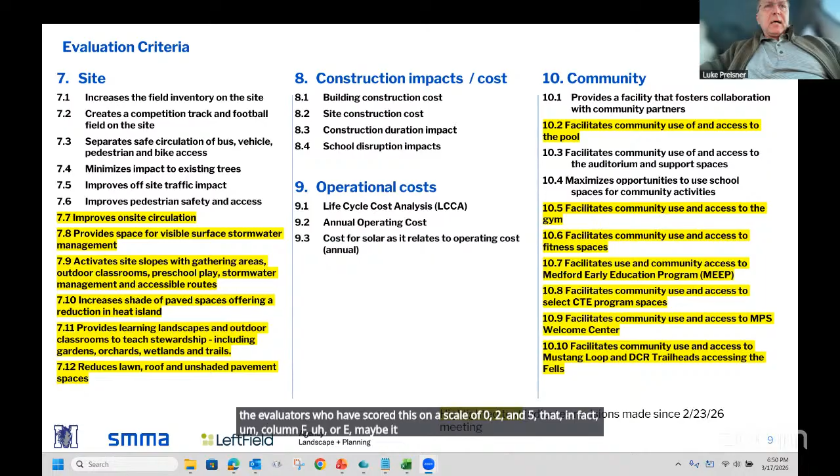Yes, I do. I'm reviewing the matrix that Matt sent out, dated 3/12, and with the code compliance option, there's a lot of red. I wanted to clarify and get an answer for the record: what we're looking at here, what we should have in mind when we see code compliance, is our existing structure after $437 million has been invested into it. So it's not the current school—it's the current school plus about $440 million worth of improvements. That's what I have in mind. For that reason, I'm surprised at some of the zeros I see in terms of magnitude of maintenance cost—I would expect it to be better after $440 million. So I just wanted to confirm with the evaluators who scored this on a scale of 0, 2, and 5 that column F, or maybe E, is in fact our current building with the benefit of $440 million of improvement.

If it's all right, I think the point is well taken, and we're going to get into the actual evaluation that was distributed to everybody. What we want to do right here, before we get to the voting piece, is just field comments on the actual criteria on screen, to make sure we have the evaluation metrics right that will be in the left-hand column as we go through the document. So is it all right if we just table that response?

Yeah. Are there any questions about the revisions to the criteria highlighted in yellow? I think this is the last page. Yeah.

So we have already voted to approve this criteria and no changes were made just now, so we don't need to vote on that again. We did that in the last meeting.

So I think we can move along to the matrix, Matt, if you want to pull that up and go through that. A is the first column, so we'll get to Luke's question first, but if you want to give a bigger point of view.

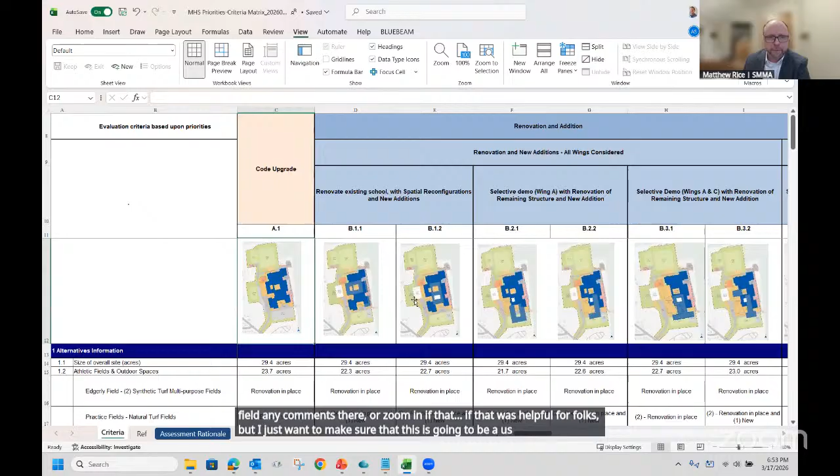Sure. We're going to dive right into the live Excel file because this is one of those inherently illegible pieces at that scale. So I want to make sure this is legible for folks as we go through. I've tried to make constant the names and references to the alternatives across the top. I could freeze up the images, but then we're left with a tiny sliver of information below. Happy to field any comments there or zoom in if that's helpful.

I just want to make sure this is a usable format moving forward. I don't know if anyone has thoughts on that before I dive in. Or if no one objects, I'll assume this is legible for folks. If you could just zoom in a little bit. Sure. Yep, thanks.

So just to refresh, I think everyone is familiar with this, but for folks watching online who have not been acclimated to this evaluation matrix, the categories we're evaluating on are listed down the left-hand column. These are the same categories we were just looking at, and any that were modified by the building committee during our last meeting are highlighted here, similar to how they were on those slides. If you get down to the 7s and 10s, you'll see those same highlights we were looking at, so you can understand the criteria.

And across the top of this document, we have the actual set of 29 different cost alternatives that were looked at through the course of the PDP phase. So really what we're going to engage in now is to look through the seed populating of this matrix that SMMA completed at the request of the building committee, just so there's an initial talking point we can look at.

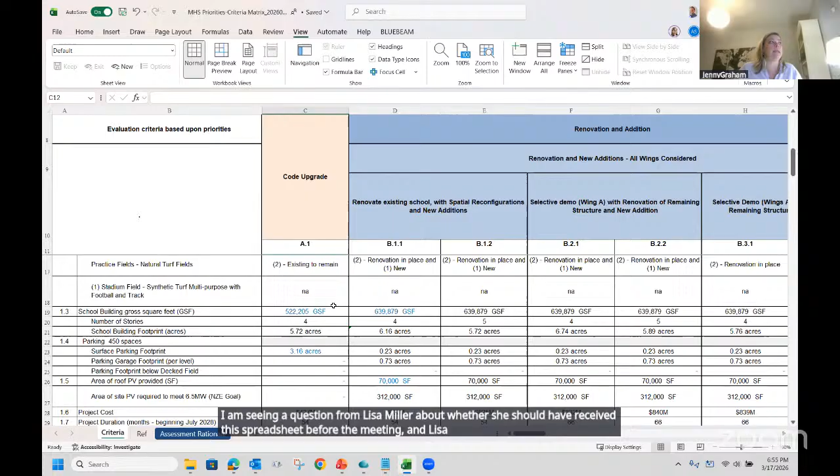I'm seeing a question from Lisa Miller about whether she should have received this spreadsheet before the meeting. Lisa, the answer is yes, you should have received this on Thursday of last week. I'm going to forward it to you right now so you have access, because this spreadsheet is really hard to manipulate given how it's been sized and paginated. Having your own copy will be very useful. Let me just forward it to you. Thank you, I appreciate that.

Yeah, it's a rough one. So let me do that right now.

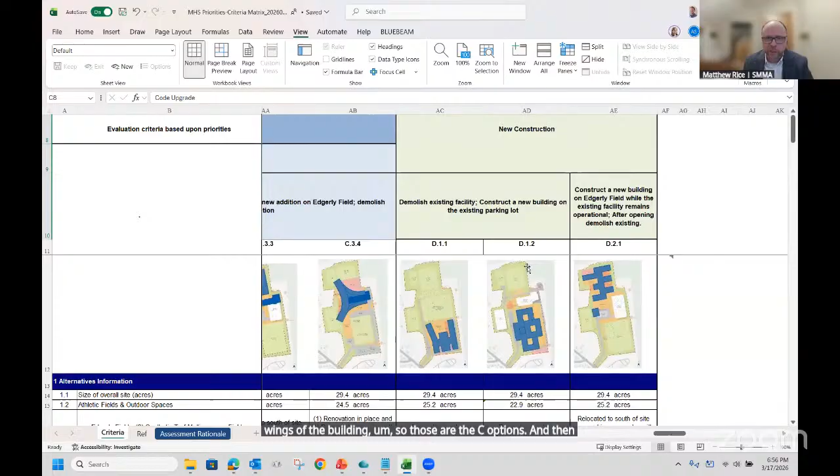All right, so maybe just as you're doing that, Jenny, to finish up the explanation of the information running across the top: we are grouped into our A, B, C, and D sets of options, with A being this code upgrade option, here the A.1. Our B options are addition/renovation options that keep and remove different wings of the existing building across the existing footprint. The C options are addition/renovation options that focus solely on keeping and renovating the existing gymnasium, pool, and athletic wings. And finally the D options are the new construction options running across the top. So that's the 29 columns across the top that we see.

I'll jump down into a quick explanation of category 1. As Helen mentioned, these are more comparative facts about each one of the alternatives, so that everyone can evaluate those in one spot and see them up against each other.

Once we get into category 2 and below, these are the actual evaluation criteria. The criteria scoring used was unfavorable, which is a 0, shaded red. There's a neutral rating of 2, which gets an orange color. And then there's a favorable rating, which is a 5, automatically color coded to green.

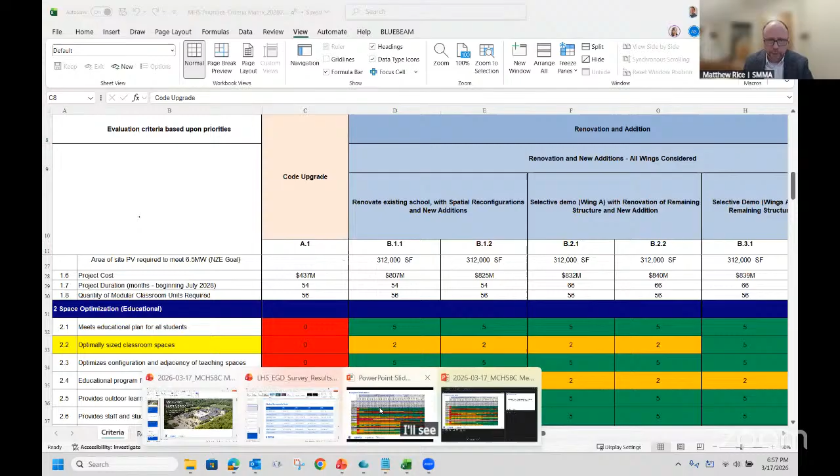So if we went back to the PowerPoint, when you see the reds, oranges, and greens, you can get a visual sense of what the individual alternatives are rated at. And then we do total those numbers at the bottom for an evaluation score.

Now, the outcome of this activity, as we fill out and discuss the criteria points, will certainly modify the scores as we go through. The scores are not requiring the building committee to pick the highest score. This is for comparative purposes—it's really a measurement of how each alternative meets the various criteria laid out and agreed to by the building committee.

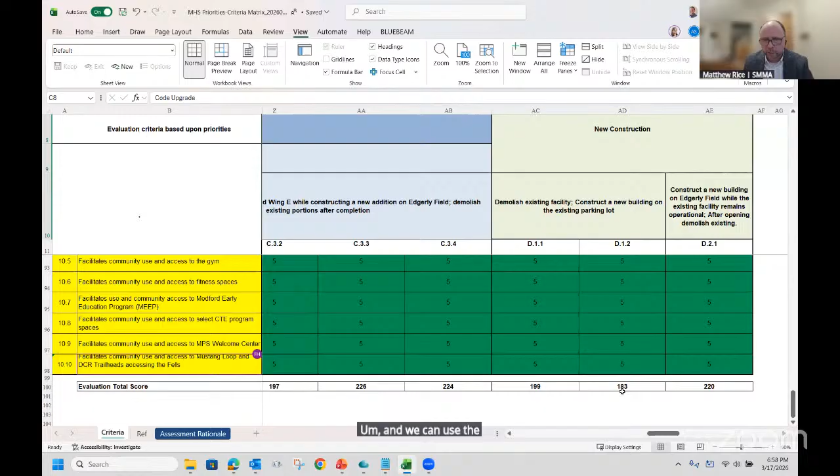So really it's a measure against that. We can use the bottom line scores to inform the thinking moving forward, but there's no requirement to pick the highest and move forward with that. That'll still be a decision from the building committee at this time next week or Monday. So from an organization and orientation perspective, is that helpful in shedding light on how the whole thing is structured and the activity we're going through today?

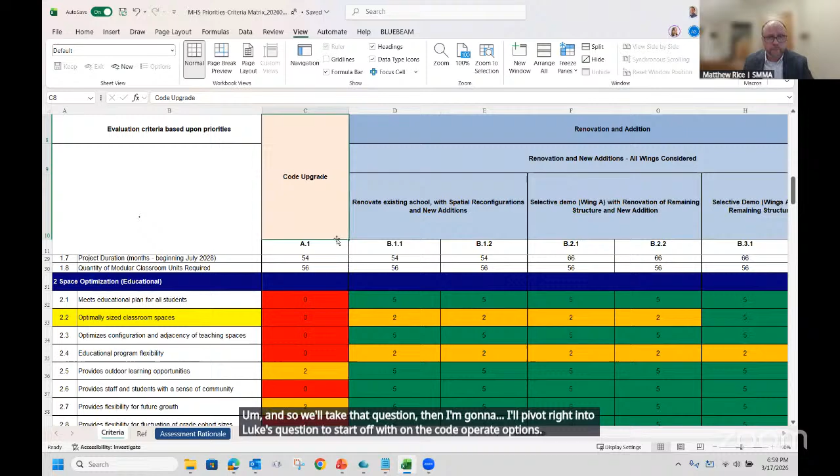So we'll take that question, then I'll pivot into Luke's question on the code upgrade options. Luke, do you have a different question or comment in response to that?

A different question, easy one. Who provided these scores? It was SMMA that generated them—a lot of it was going through on my end, trying to synthesize the various pieces of information. Thank you.

Are there any other questions about the general layout of this document before we dive in? I have a question, Phil? Yes, so the unfavorable, neutral, and favorable—is that in relation to the educational plan, or what are you looking at when determining whether something is favorable or not?

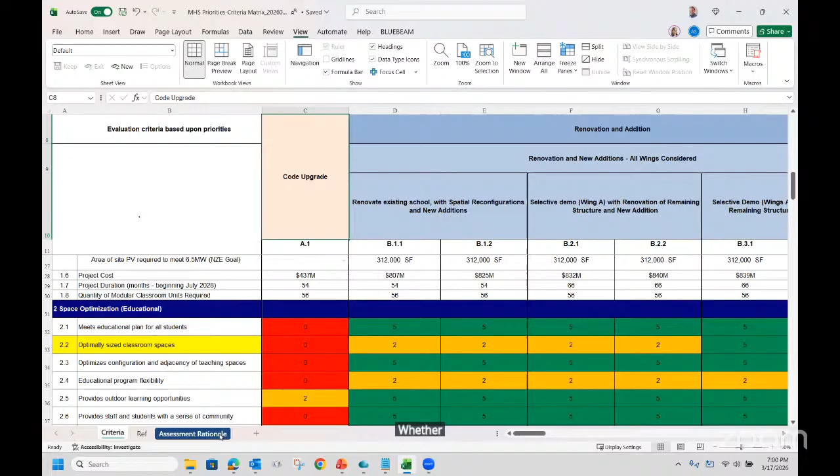That's a great question, Phil, thank you—sort of a segue. There's another tab in this document. There was a request by the building committee at our last meeting to provide that exact rationale to explain what each of the criteria was judged on. Some criteria are more subjective in how they were evaluated, some are more objective with a numerical basis tied to them. This tab runs through and provides the assessment rationale, as the tab is noted, behind each one of the criteria. So if you have this document open, you're welcome to flip to that tab so we can get a sense of what was used to evaluate the different criteria.

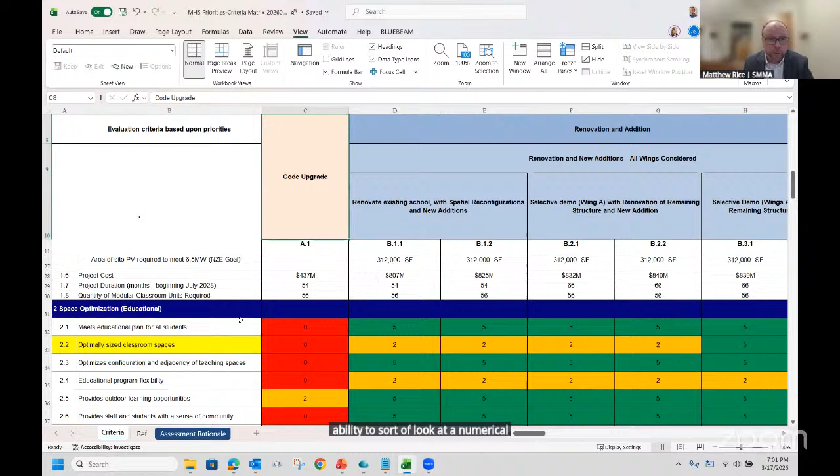In some cases we are still very early in the process, and there are some criteria where we may have a more objective ability to look at a numerical comparison as we move forward, but we don't necessarily have that information just yet in terms of the overall evaluation.

I'll point out, while we're on this topic, if we go down to operational costs here in 9, there's been no ratings assigned because all of these items fall into the category where we just don't have a way of accurately representing what a life cycle cost analysis would be, annual operating cost, or the impact of the solar PV panels on operating cost. We will start to get some insight into life cycle cost as we get farther along in the PSR phase, and that's actually one area where focusing in on a smaller set of options will help us get insight into that topic more quickly.

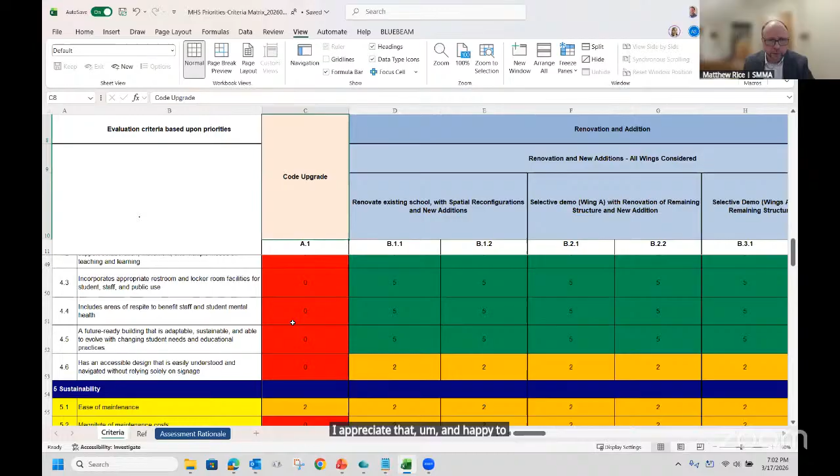Does that help answer your question, Phil? Yeah, it does. I think I'll just read through some of those as we go and pick and choose which ones we're looking at. So thank you. Appreciate that. And happy to hop over to the assessment rationale tab as part of the meeting here, if that's helpful for folks.

Matt, can you address Luke's question about code upgrade next? Yep. So the ratings for the code upgrade option, we're assuming that the building is improved to meet accessibility code, energy code, structural codes as part of that scheme itself, that alternative. So it does represent the investment of the $437 million that is listed as the cost for A.1 in terms of the evaluation criteria that's here.

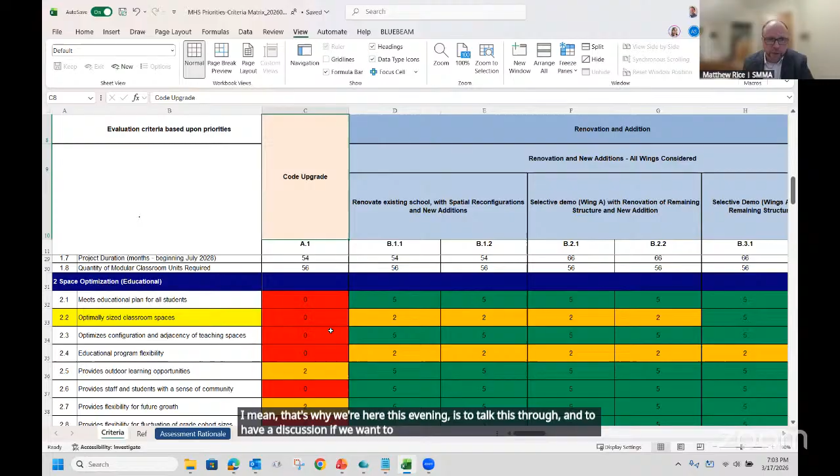And certainly happy to go through the dialogue on the code upgrade option here. Again, this is sort of the perspective that I had going through it, but complete respect the fact that others on the building committee may have different perspectives. And I mean, that's why we're here this evening, is to talk this through and to have a discussion if we want to make modifications to it. As a collective, that's exactly what we're here to do.

And I think, Matt, Luke was zooming in more on the maintenance aspect of the... Thank you, Helen. Yeah, I pointed out maintenance, but there's other ones. There's one, for example, 4.3, talking about appropriate restroom and locker facilities. I would imagine for $437 million, we would end up with appropriate restroom and locker room facilities, regardless of what we started with.

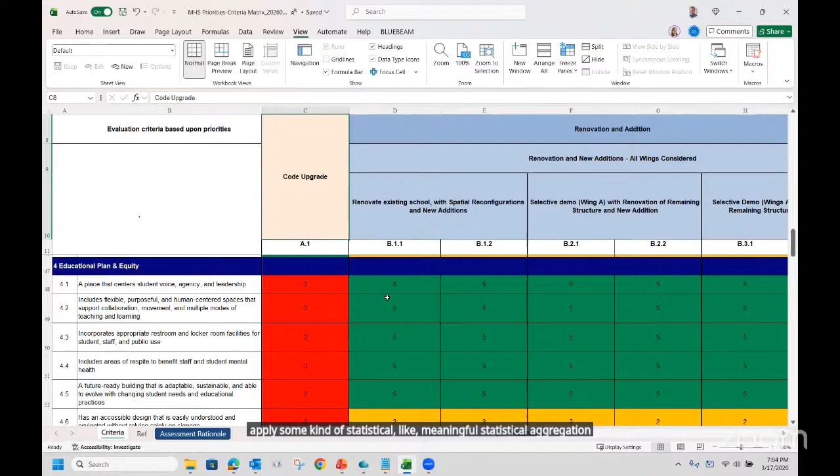There's other examples, and if we wanted, everyone could take homework and score this however they like. And either Left Field or SMMA could aggregate, average, or apply some kind of meaningful statistical aggregation method to have kind of a composite score, so that it's not just one person picking between 29 concepts. It's a collective effort. I'm not making a motion right now, but I'm just saying, one way to maybe capture the voices of the SBC.

So the goal for tonight is that we will emerge with a chart that we agree is reasonable to use for comparative purposes. That does not mean anybody has to agree with every single item, nor does it mean we must use any bit or all bits of this data next week when we make reductions to sort of narrow in on 3 to 5.

So everybody is absolutely welcome to take this and make their own version of it and use that for how they want to proceed next week in terms of what they want to learn about, what they want to study further. But for tonight, the goal is for us to collectively get to a matrix that we can put on the website and share as a working draft, as a working document that this team is in agreement with.

So if you have a specific proposal, just like we did last time, if you have a specific proposal for something that you would like to change, and maybe let's just take this like a chunk at a time, we can poll the committee and take a vote about what those changes might be. So let's start with A.

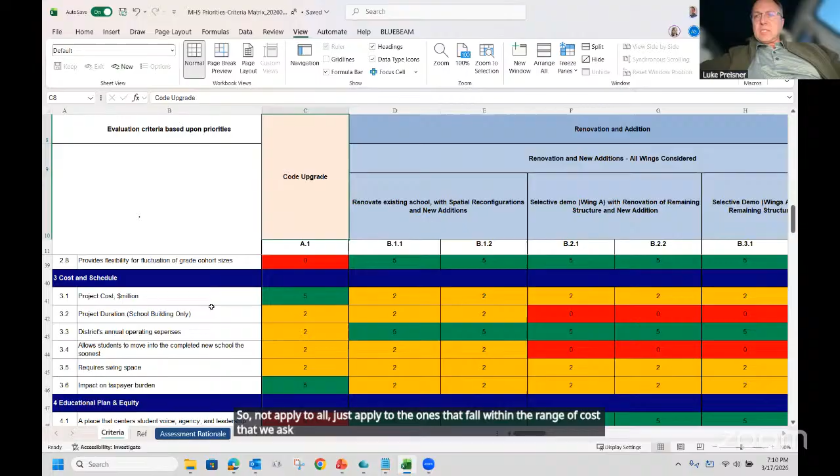Is there a second? Oh, and also to only the concepts that fall within our RFP range. That's an important part—I want to reward the concepts that are within our RFP range. So not apply to all, just apply to the ones that fall within the range of cost that we asked the design community to consider for our project.

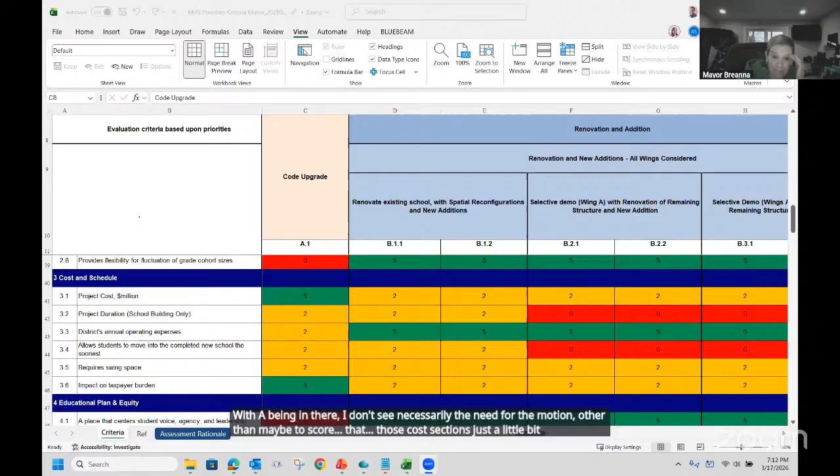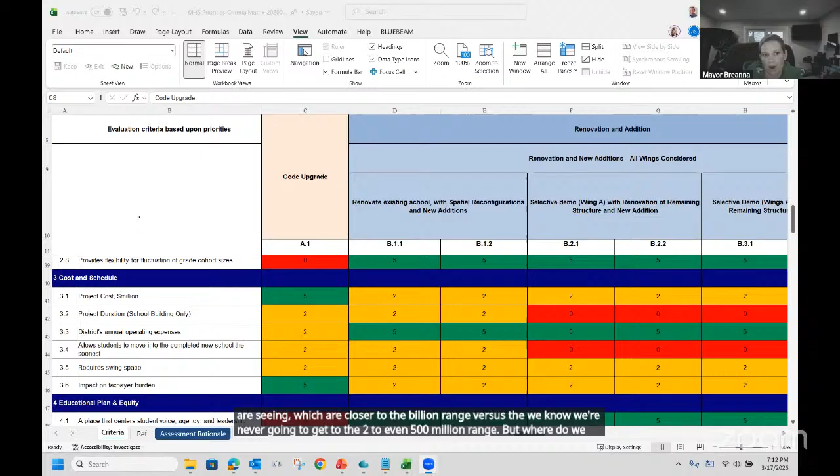I'm trying to understand the motion, but either way, I think whether it's now or the 23rd when we have to actually go down from 29 to 3 to 5—I noticed in the presentation that we will be having a meeting on cost, or two, in May. With A being in there, I don't see necessarily the need for the motion, other than maybe to score those cost sections just a little bit higher, because a few of us—and I know myself—are nervous about the cost and the price per household and what we're hearing when we're out and about. We all on this call want to see the debt exclusion pass come May 2027. So there needs to be a time that we talk about the price tags we are seeing, which are closer to the billion range versus we know we're never going to get to the 200 to even 500 million range. But when do we talk about the cost and making the tough decisions to figure out what this community is willing to vote for and pass, and how much our residents are willing and able to pay? That has to come at some time, now that we know all these numbers and we need to narrow down, that we just need to talk about that.

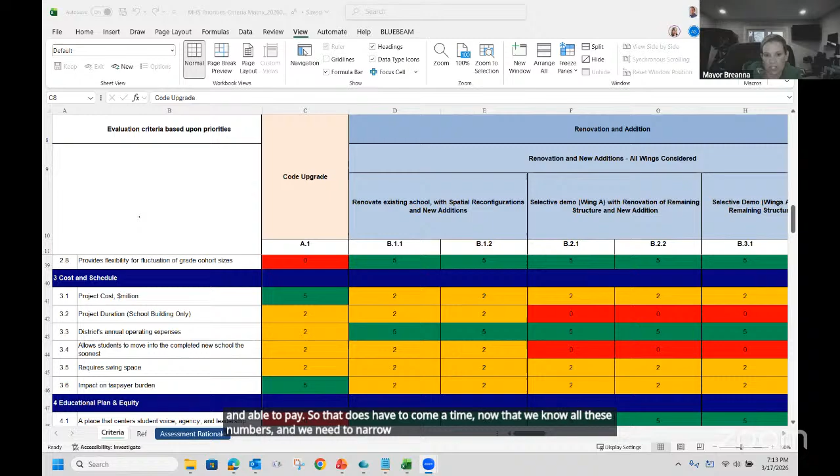Respectfully, now is not the time. This is not the right time for us to be arbitrary in how we move forward. This is a time for us to commit to the study that will help us refine these numbers, because these numbers are based on very, very high level things, and we'll be able to know the cost more precisely once there is more work done by the design team.

So I'm still not hearing a second. Paul, did you have your hand up to provide a second? No, and I'll lower my hand. Okay, I'm not hearing a second. In the interest of time, let's move on.

Are there questions about the B1 category or the B2 category?

And Matt, maybe you could just describe those two categories briefly for us so that everyone is oriented.

Sure. I know it's a little tough to see these diagrams, but these will give you an idea of generally what's going on. Someone will just have to help me with the colors to start off with. The dark blue, that's where my cursor is here. Yes, that's the existing building that would be renovated in place, the footprint of the existing building. Is this a blue-gray, maybe? That's good, okay, I'm good, I'm 2 for 2 right now.

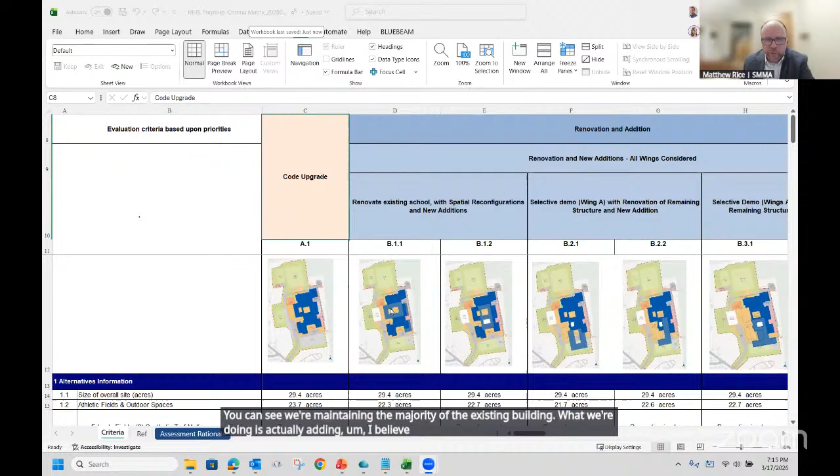The blue-gray represents addition construction in the overall scheme. So in this particular B1.1, you can see we're maintaining the majority of the existing building. What we're doing is adding, I believe this was 2 floors on top, or maybe just a single floor over this section, as well as expanding out the CTE wing in a couple directions towards the east and towards the south. So B1.1 and B1.2 is really trying to keep as much of the existing building as possible. B1.2 is similar to that, and this is the one that is adding in yet another level, because you can see that we go from stories 4 to stories 5. This also, in some of these options, you'll see that there are some white areas here as we go through in the B-wing, where we're proposing there will be some selective demolition, essentially carving out the center of the B-wing, because we have science classrooms as well as general academic classrooms and special education classrooms that all have no windows in the middle of that B-wing right now. So that would be something we're trying to alleviate as part of these initial B options that we're looking at. So that's B1.1 and 1.2 - basically keeping the majority of the existing building and adding to it.

Are there any proposals to change the rating or evaluation of any of the B1 or B2 options?

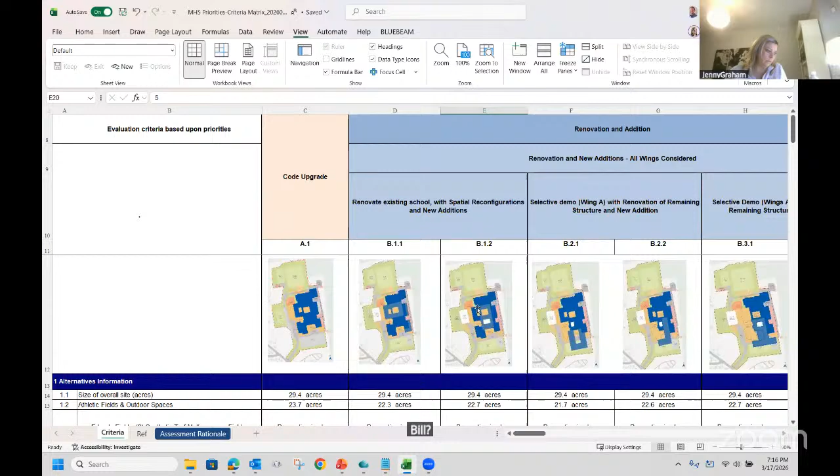Bill? So I don't have a proposal to change the option. I was looking at it because there's so many options and so many criteria. I was trying to streamline the analysis, looking at what criteria have a lot of variability in their rating. So 2.5 to 2.8, they're all green, aside from the code upgrade, so there's no point looking at that in my opinion.

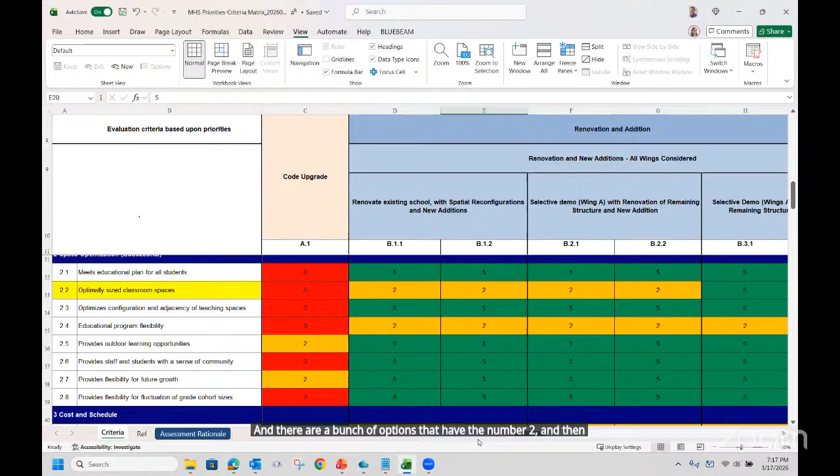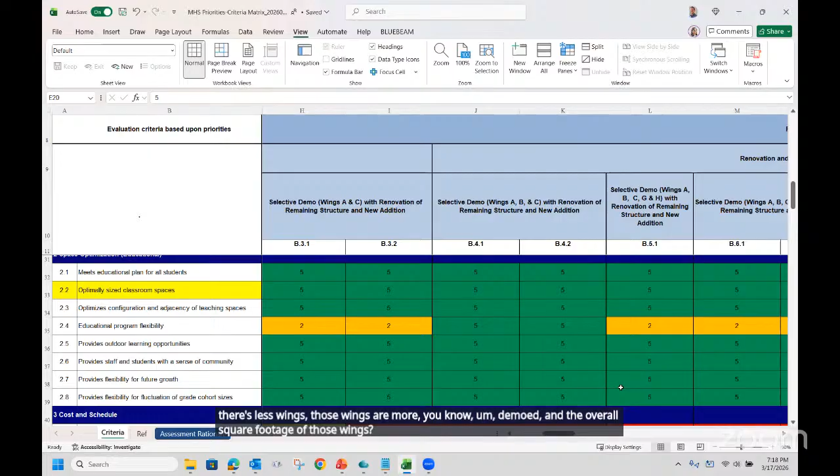So I was looking at 2.4, educational program flexibility. There are a bunch of options that have the number 2, and a lot of them that have number 5. My question is on B4.1 and B4.2, those are 5s, and those have selective demo of wings A, B, and C. Then the column next to it, 5.1, has more wings being potentially demoed, but it's only rated as a 2. When I went to the assessment rationale, it was evaluated on the percentage of existing construction maintained, which will drive program flexibility. So I was curious why those got a 5 rating - is it just because even though there's less wings, those wings are demoed more, and the overall square footage of those wings supersede the other ones on the other columns?

Yeah, it's a good question, Bill. There's some subjectivity in trying to understand what educational program flexibility means. But the reason 4.1 and 4.2 got rated higher - and we're happy to modify this as part of the process - is that the classroom heavy wings are the ones being built predominantly new in 4.1 and 4.2, versus in 5.1 and say 3.1 and 3.2. It was looking at the percentage of existing classrooms, with the understanding that existing classroom wings provide an inherent limitation in terms of flexibility, or at least that's how the scoring was viewed and evaluations were made. If there's something that doesn't look like it's aligning with that, it may have just been not having a complete connection between the rationale, but that was the thought process for why some got 5 versus 2 in the ad-reno schemes. Whereas when you move to the new construction, you'll see they're all pretty equally 5, because we would have the ability to design in that flexibility.

Okay, yeah, and I would say, Bill, I noticed the same thing. There's actually a small number of things for which there is the majority of the variability, and I did spend more time looking at that than all the places where there was stuff in common, to make sure that I understood where those variabilities were.

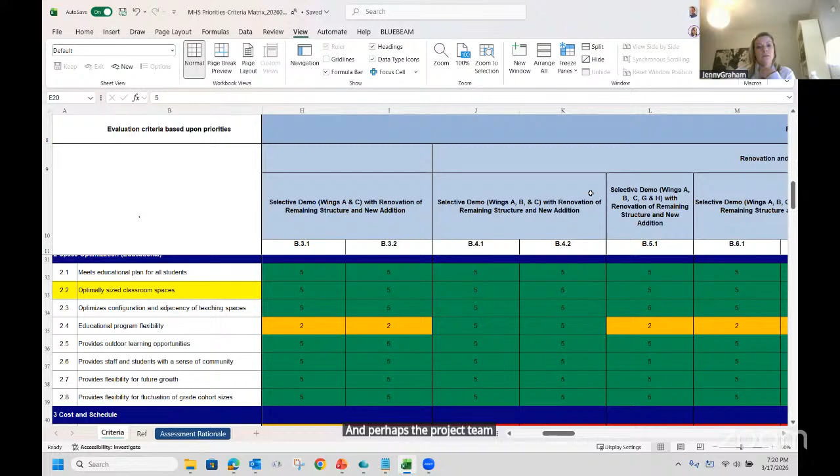But it is a substantially smaller list than this whole thing, if you were to pare down this view to the things for which there are differences. Perhaps the project team could give us a view that's a little easier to read, where the only thing we're seeing are the things that are materially different. We can talk about that, or maybe somebody can make a motion about that later on. Lisa has her hand up.

I was just wondering if somebody could clarify what we mean by flexibility. Are we talking about configurable spaces with dividers that can be moved around, so that the physical space itself is flexible, or are we talking about flexible usage? What would that mean in terms of design? That's my main question.

I think it's the first thing you were describing, Lisa, in terms of having some ability to reconfigure the program around and put the program into the spaces in a variety of ways. That's really what was guiding the thinking, saying that if the existing classrooms in the C wing are a little bit smaller, you just have inherently a smaller opportunity to consider putting something different than a classroom, or having to expand the walls in some directions to get to the target classroom size, the target program size, as part of the process.

So just as a follow-up: it would mean having partitions that could be moved around, or some way of reconfiguring the space. Have you found that other schools designed with that flexibility actually use that flexibility?

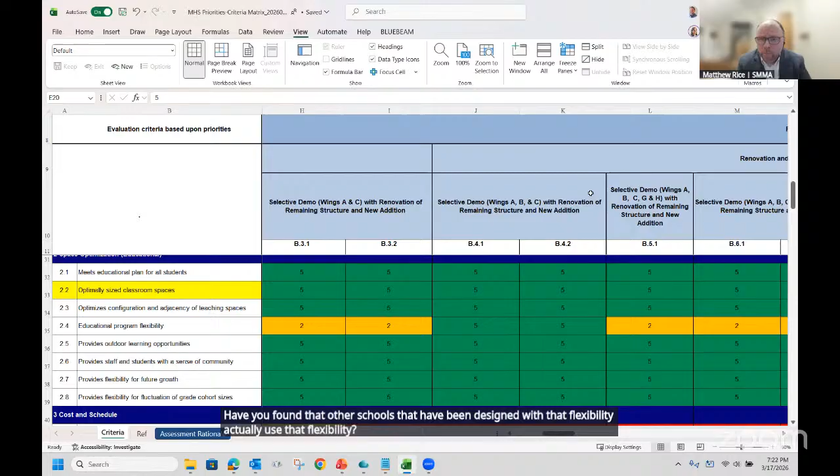There's some that do and there's some that don't, in terms of the operable partitions. I think it's part of the school culture. Usually in any project scenario, that is not present as an option in terms of the overall operations of the school. So whether there's professional development done as part of the project in advance of the new building opening, some of that can really help to leverage the flexibility that would be built into the building that way. Thank you.

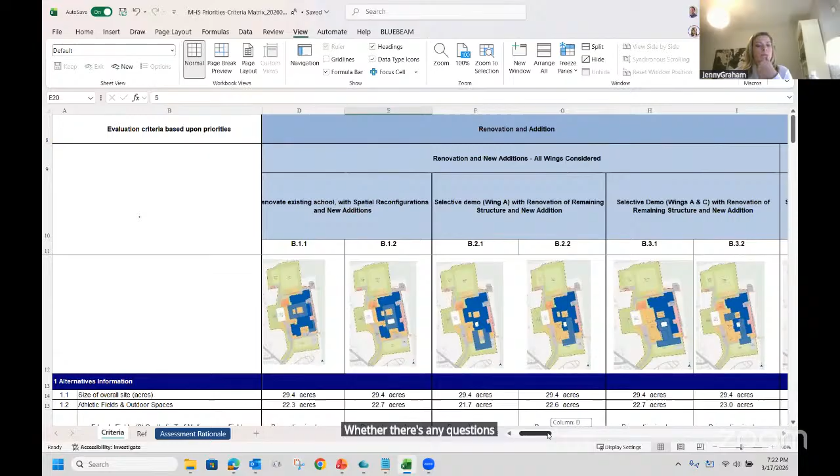Can you describe categories B3, 4, and 5 to us? Then we can ask whether there's any questions or clarifications of those three items or categories. Yeah, and I didn't go through B2.1 and 2.2 — do you want me to? I'm sorry, yeah, so I can capture all of those, because you'll see the pattern generally in terms of how they evolve over time.

We're starting to look at pulling away existing wings of the building and providing more new addition space just to compensate for the removal of the existing wings. So B2.1 and 2.2 really look at the removal of primarily the A wing, the performing arts and arts wing, in the bottom left-hand corner here. You can see the additions being proposed — in this case, if we look at the number of stories, this is a 4-story addition in a U shape.

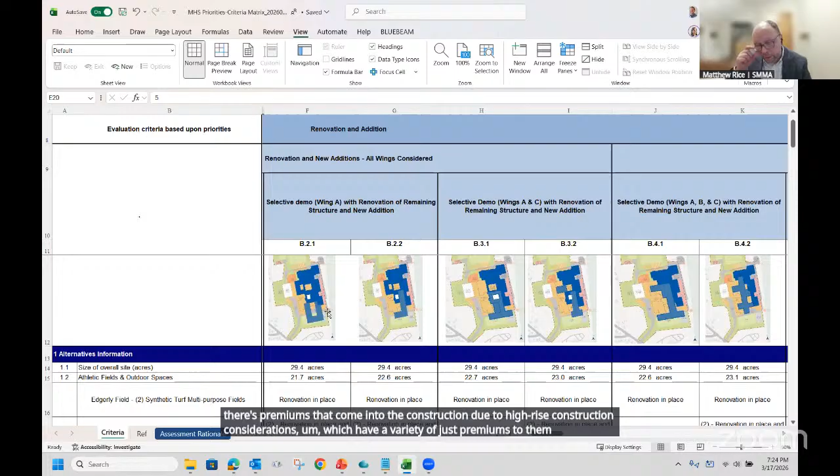This addition actually proposes going over the top of the existing B wing in a 5-story option. So in most of these options, where we're looking at 2.1 and 2.2, we're looking at different ways of massing the building. As we go higher, there are premiums that come into the construction due to high-rise construction considerations, which have a variety of premiums on a mechanical system basis, as well as fire code and robustness of construction. So we're giving different options — we wanted to understand the cost benefit.

When we go higher, you also get more opportunity to utilize the site area in different ways. Even though these sites haven't been fully designed yet, it's really allowing for some opportunity moving forward. So that's between B2.1 and 2.2.

It is that removal of the A wing and then additions in different configurations. 3.1 and 3.2 are looking at the removal of the A wing as well as the C wing, one of the primary classroom wings, which has the most classrooms within the existing building. A lot of these will build south towards the existing parking lot, some consuming the entirety of the lot, others consuming more of the entry plaza, based on the addition sizing needed to meet the overall area.

So 3.1 and 3.2 are both taking C wing and A wing away. In 3.2 there's new addition construction shown on top of the C wing footprint, while 3.1 does not have that. Both options are looking at carving out from the B wing to alleviate the issue of windowless classrooms.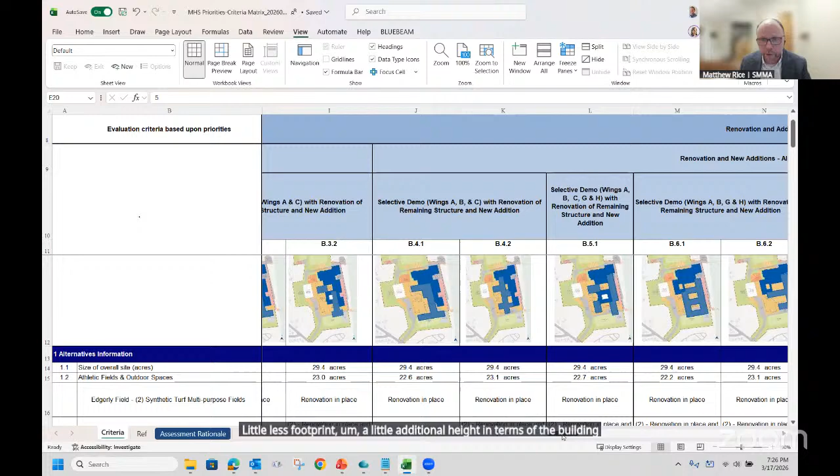Do you want me to keep going with that, or should we pause there maybe on the 4.2?

Yeah, let's pause there. Are there any questions about B2, 3, or 4? I can get them all on the screen.

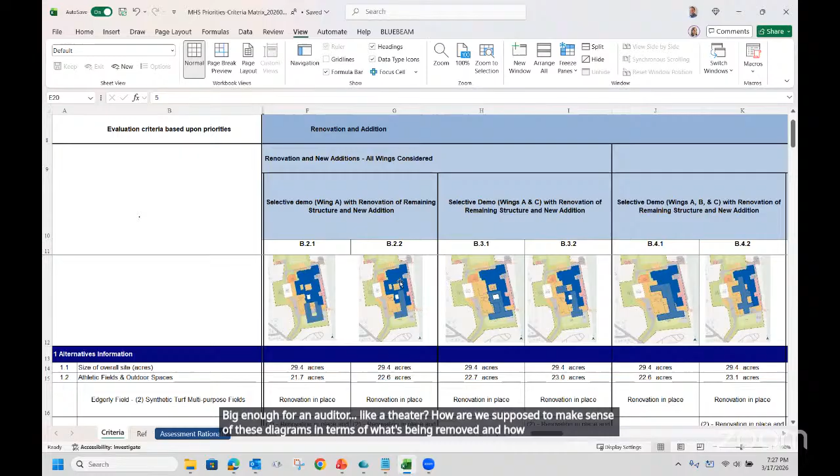I'm sorry to ask again, but can you help us understand in the diagrams—like if you're tearing down a building, that means the theater is being torn down. But if I look at B22, it doesn't look like the new construction has a space that's big enough for an auditorium, a theater. How are we supposed to make sense of these diagrams in terms of what's being removed and how the design would accommodate things like the theater?

So from a high level perspective, we have to make the assumption that the new area or the existing area that is in there—because it's just working on a sum total of areas between renovated space and new construction space—the sum total of those will meet the program. That's how these have all been organized, based on how the program has been laid out.

So that would include the auditorium, include other spaces. Exactly where those things fall in each of these schemes hasn't been fully worked out—that's not the intent of where we are here. We did indicate some potential locations for major program areas like the auditorium, the media center, the dining commons, in the diagrams when we showed those three-dimensional pieces up front.

But those positioning elements really shouldn't be the determining criteria at this early point. It's really looking at the overall massing and what it does in terms of opening up areas on the site, or any of the other criteria listed below. So to evaluate this, where the auditorium is wasn't one of our listed evaluation criteria—we're just not at the point where we've laid all those pieces out. That's exactly what's going to happen as we advance with this smaller set of options moving into the PSR phase.

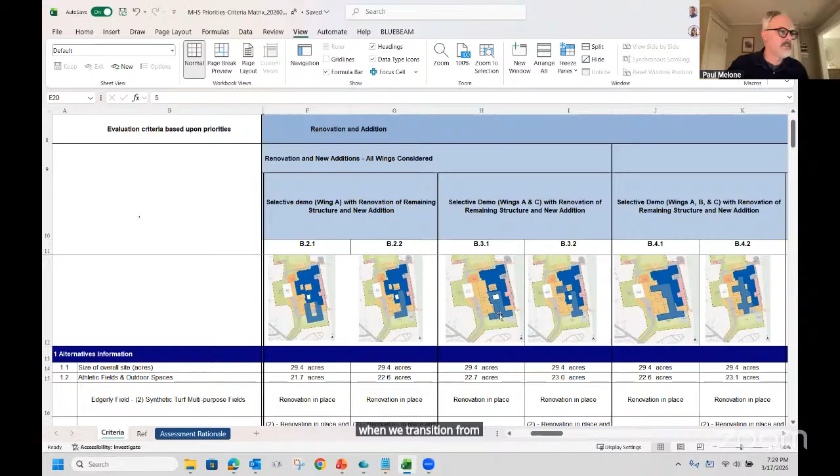What I'm seeing is if the A wing goes away, the existing auditorium goes away. So any new auditorium space would have to be more accessible to the community, so it automatically gets a 5. Is that fair to say? That's exactly the thought process, yes.

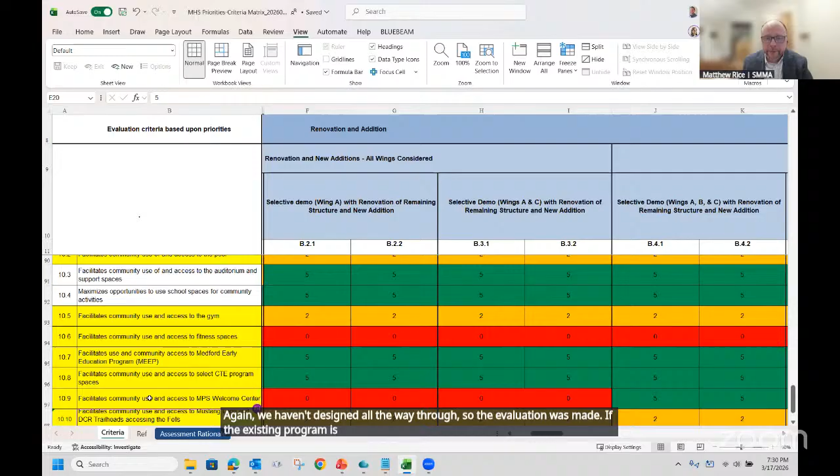That would go the same for any of these elements listed out in the 10 community grouping of criteria for the individual items. We haven't designed all the way through, so the evaluation was made based on whether the existing program is remaining in the current footprint. That was scored lower. If we have the ability to locate a new piece in an addition because it's been demolished, that's scored higher, and we acknowledge we don't know yet where all these parts would end up. It could be that even though an existing piece is remaining, it could get put in a new portion of the addition versus the existing building. There's a little bit of a leap of faith in the rating, and we're happy to modify any of those if people have strong feelings one way or the other.

Any other questions about or changes to B2, B3, or B4 or proposals?

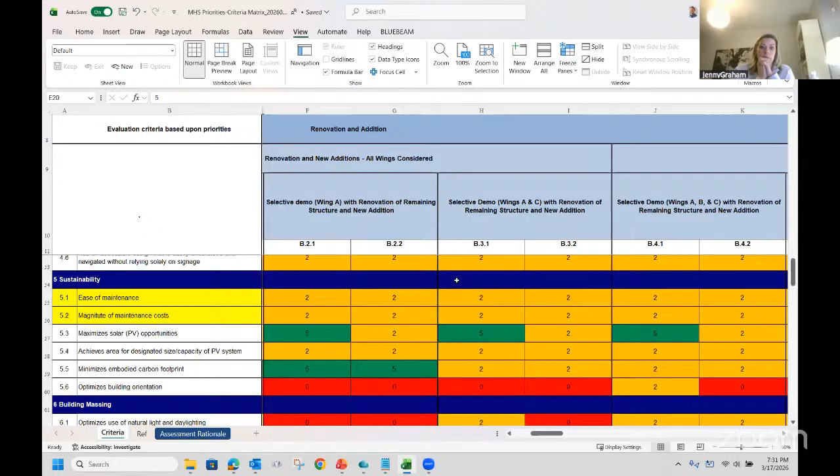Okay Matt, can you go on to B5? It's 5, 6, and 7. Let me see what I can fit on the screen. Maybe the 5, 6, and 7. Yep.

For 6.1 and 6.2, now we're looking at demolishing the majority of those existing wings aside from the C wing, as well as that collection of athletic and pool building wings. So here we have the A wing, the B wing, and the vocational wings all being demolished and replaced with an addition. In this case, this is a 4-story addition with multiple courtyards in the middle. This is a slightly different way of organizing that same concept, still the same pieces coming down, still keeping the C wing as well as the athletic portion.

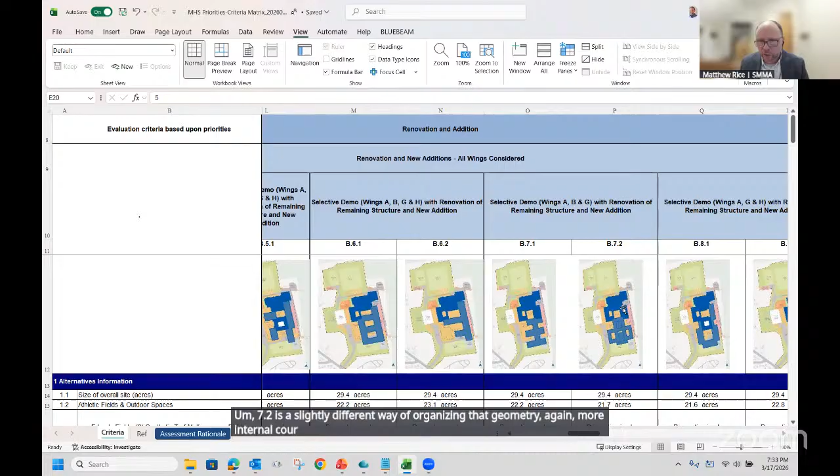7.2 is a slightly different way of organizing that geometry, again with more internal courtyards associated with it. Both scenarios are still at the 4-story condition, just looking at different geometries.

One small nuance here that probably won't drive things entirely at this point, but something people may have noticed in terms of the orientation of the buildings: an east-west geometry like this would be most beneficial from a passive solar management standpoint for the massing. That's because the predominant quantity of windows on these buildings would be on the north and south elevations, which we have the best ability to control passively. So from an energy efficiency standpoint, this type of geometry has some advantage, though it's obviously just one criteria piece in the current list below.

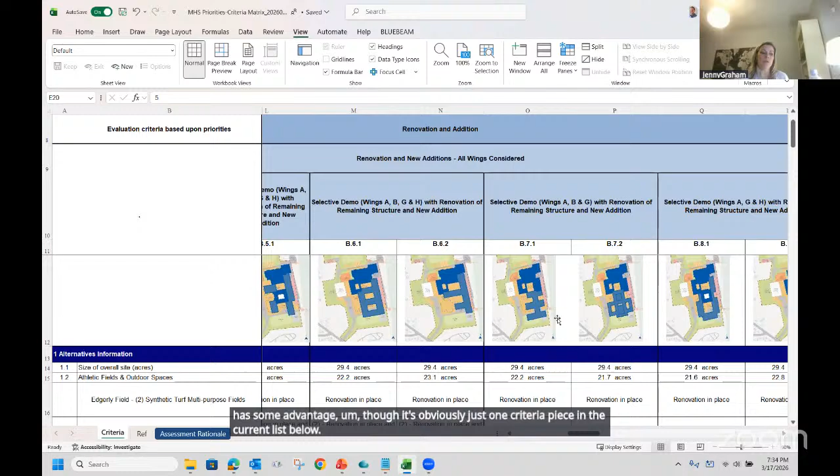Libby, did you have a question or a proposal? It's a question, but I might have found the answer in the assessment rationale tab.

I'm curious about a lot of these options we've been looking at down in section 10, about facilitating community use and access to the fitness spaces. Assuming we're renovating them, I don't see why there's such a big jump. This is why I think I might have found your answer. Sorry, I may be wasting everyone's time, but it was confusing to me that all of a sudden they get better when they're still just being renovated. Is that just because you're demoing something, providing better literal access? What's the big jump?

Yeah, it goes right back to Paul's question actually, in terms of the fitness spaces being right in this bar. They're just challenging to get into right now - you have to go into the building, they're sort of an interior location. So once we get to options where this piece is demolished and rebuilt, that's when the jump happens in terms of the higher priority given to it.

We can probably argue that, and you could probably easily convince me it would be a different rationale in terms of how we might be grading those things. But that was the approach used, just to have a consistent brush across the different options. Sorry if that was already asked - I've been trying to read through this. No, you missed that - it's good. I think it reinforces my response to Paul, which maybe wasn't as clear as it needed to be, so hopefully if we go through it a couple times people will understand the thought process, and happy to modify as we go. It makes sense, I might have been heads down in the Excel doc, thanks for clarifying.

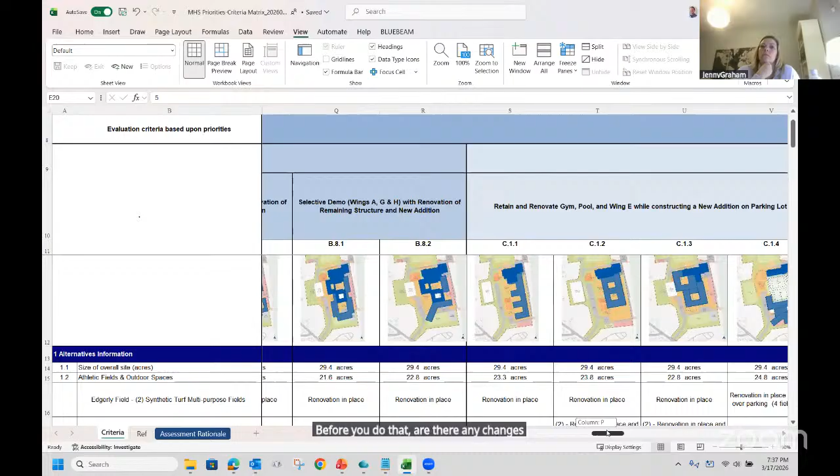Okay Matt, do you want to keep us moving with 7 and 8, B7 and 8? So I did just cover 7.1 and 2, so I can jump over to the 8s. Before you do that, are there any changes or proposals for 7? Okay, take it away.

All right, so the 8s - I'll cover these and then pause before we jump to the Cs. Again, looking at preserving different parts of the existing building. Here we're keeping the B wing and the C wing, which are the most highly populated academic classroom spaces, plus the entirety of the athletic wings. This would include replacing the vocational wings, the performing arts wing, and the arts wing wrapping around with the generation of a couple additional courtyards, along with modification of the existing B wing.

The exact same complement of existing wings remains in 8.2, but with a different geometry, less courtyard based, reaching out towards Steve Miller Drive. We're not talking about the design and layout yet, but sometimes we can't help ourselves and want to look at what it would mean to organize the building geometry differently and understand what that means coming up Steve Miller Drive. That's really the reason for the 8.1 and 8.2 options - just looking at different ways of massing that geometry.

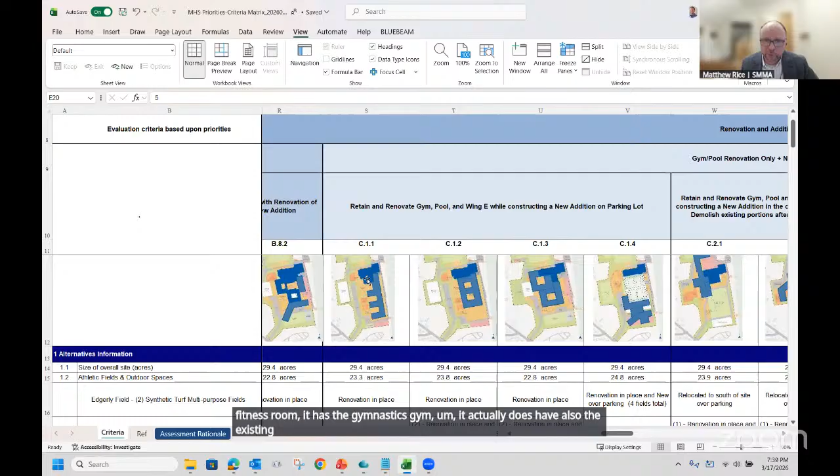All right, let me go through these four first, the C1 options, 1.1 through 1.4. As a refresher, the C options all deal with salvaging or renovating the existing athletic wing - including the gym, the pool building, and a large proportion of the existing wing with the fitness room and the gymnastics gym. It also has the existing cafeteria spaces, but this means we're not renovating and keeping two different cafeterias on two different levels - that's not part of the educational plan moving forward. It just means that space would be renovated and reused as part of these overall schemes.

The C1.1 option is looking at a series of legs that extend out. We're replacing and building on top of the existing performing arts wing, the B wing, the C academic wing, and the vocational wing. All of those program spaces will get reconstituted to some degree within the footprint of the new addition, as well as the existing renovated space. The gym is going to remain a gym, but what happens to locker rooms below the gym could certainly be used for other types of program space that we'll vet out as part of the next more detailed level of study.

Can I ask a question about C.1.4? And we just lost your share. We may have lost Matt completely. That was very interesting. I came right back, didn't it? My internet dropped out, it seemed like I was kicked out. I don't know if I said something to offend Will, or it just got a little choppy for me.

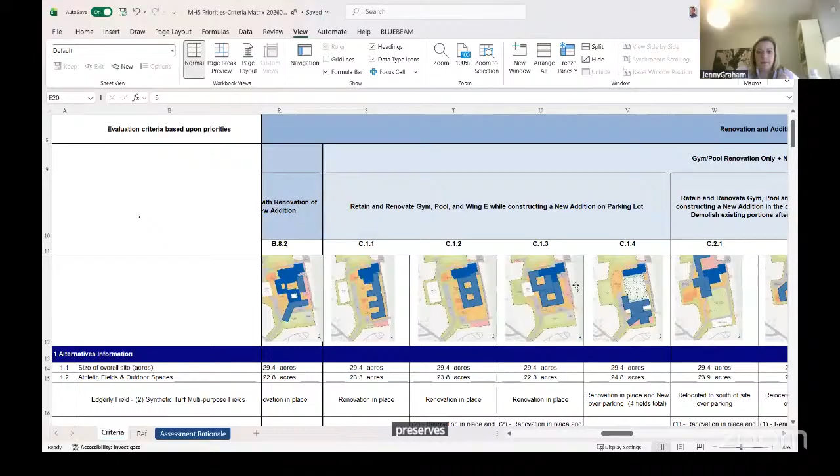So C.1.4, it preserves and renovates the gym and the pool in its current location, correct, but it disconnects it from the rest of the building and separates it by playing fields. Is that correct? It's a playing field with parking below it, so it would be an elevated deck. There might be some ability to run some type of interior connection, a long hallway running in between, or you could potentially walk at the field level in between the two. But it is a different approach in terms of how to potentially mass the buildings for sure.

Thank you. Other questions about C1.1 through 1.4? Comments, changes?

Okay, do you want to go on to C2 and C3? Yeah, let's see if I can. I don't know if I can fit all of them. So I'll start with these four, the C2s, and then C3.1 and 3.2, and then I think it'll make sense when we shift over. Let me scroll up a little bit.

So the C2.1 options are looking again at the same type of approach in terms of what we're saving, the gymnasium and the pool and that dining piece. But we're actually looking at building on a combination of the hillside that's just located to the west of those existing wings, and then stretching a bit towards Edgerly Field as well.

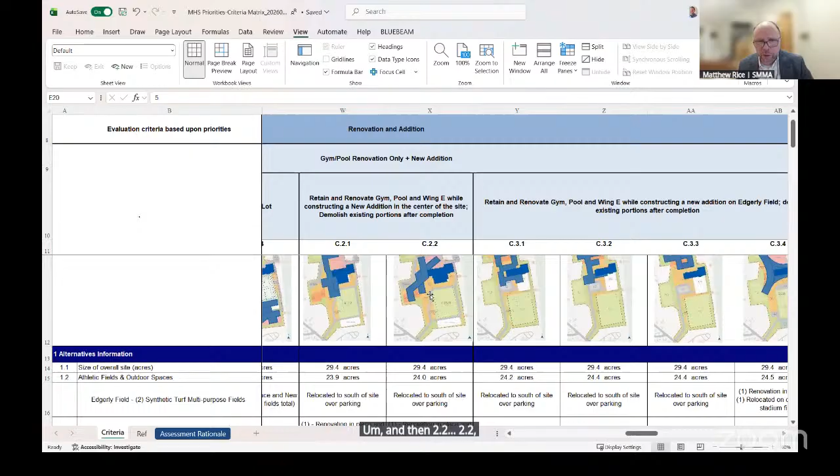And then C2.2 does a similar type of activity in terms of connecting that lower elevation up, but there's more horizontal footprint here, so we did not need to go up to 7 stories. This would be a 5-story option going up.

And then the C3 options, so C3.1 to 3.4, are all looking at building more of the new construction on Edgerly Field itself. In that scenario, and to varying degrees with these, we're again recreating field space down below. In some cases, we might have the ability to overall increase the field inventory on site by maintaining some up top and creating some down below as well.

As we shift to building on Edgerly Field primarily, this addition could be connected down below or up above with some type of bridge or connection below the surface. If we're building off the entirety of the existing footprint, which is what Edgerly Field offers, that starts to become the scenario least impactful to education, because we can build a majority of new construction without impacting what's going on down here, other than site construction access. There's still going to be trucks accessing the site and building things.

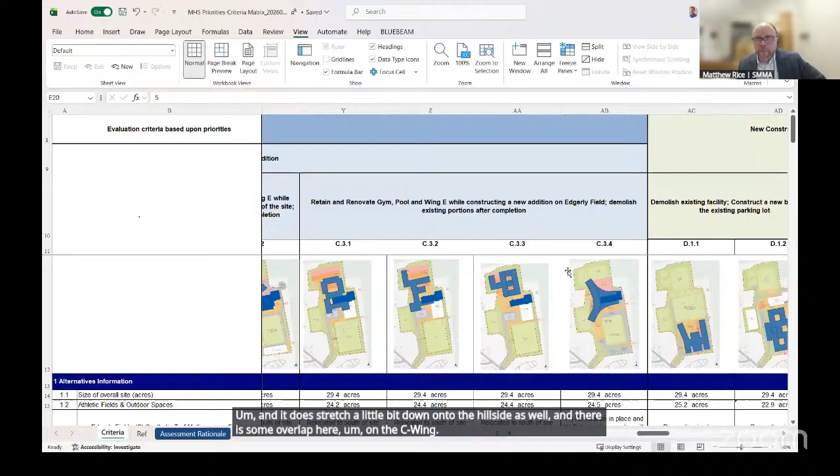I did have a question as I looked at some of these C options. Under cost and schedule, 3.4 and generally these were all the same with two exceptions—C3.3 and D2.1 had fives, and everything else was leveled at a 2. But when I look at the project duration, they are all the same. Is there something else in the criteria there besides project duration?

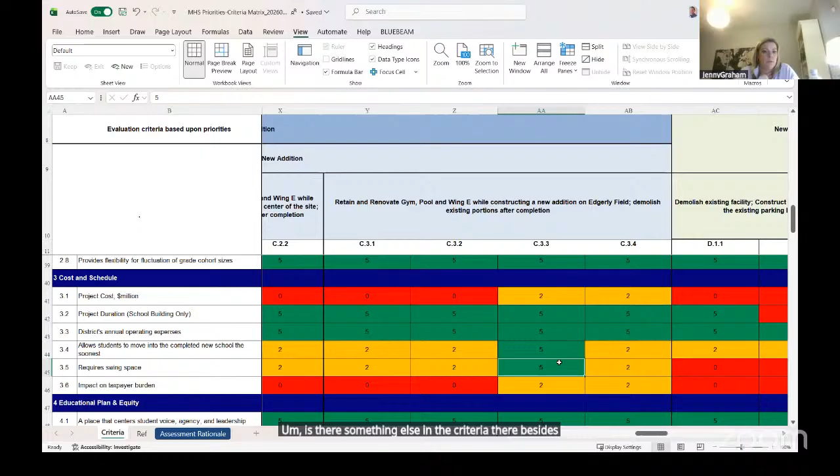Yeah, when we are evaluating allowing students to move into the completed new school the soonest—the trick here is that there's more square footage to build up front that would not be impacting the existing footprint. So the overall duration, when we were just looking at the amount of square footage that would have to be built, doesn't present itself to be consequently different at first glance.

Again, when the construction manager comes on board, we'll be able to get a much more educated view of whether there are nuances that would allow a portion of it to be opened early if they're going to build it in phases or something along those lines.

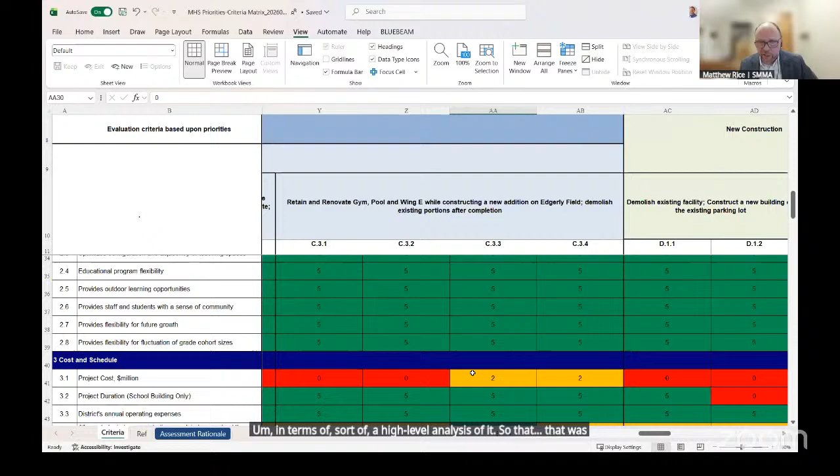The reason the swing space evaluation criteria for C3.3 and for D2.1 are rated 5s is because those are the two that conceivably don't require the use of temporary modular classroom buildings to be built, in terms of a high-level analysis of it. So that was the deciding factor on those that got the 5s, if that makes sense.

Yeah, that's helpful. Thank you. Will, did you have a question?

Yeah, I did. So a lot of these C options and some of the later D ones have better on-site traffic, but I'm noticing the buildings are kind of built farther away. What's kind of the correlation? Is it just because there's more room now to play with driving, or is there something else at hand there?

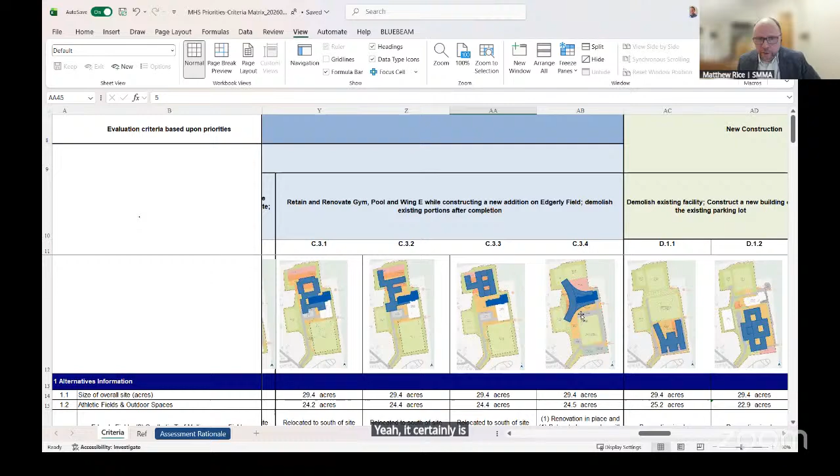Yeah, it certainly is one of the more qualitative criteria in terms of how it was scored. I think the rationale, hopefully discussed a bit in there, is giving us a little bit more room to have circulation down towards the southern side of the site when you come in, and not having the building so close, was seen as providing more opportunity for a more optimized condition at the end of the day, just because you have more space.

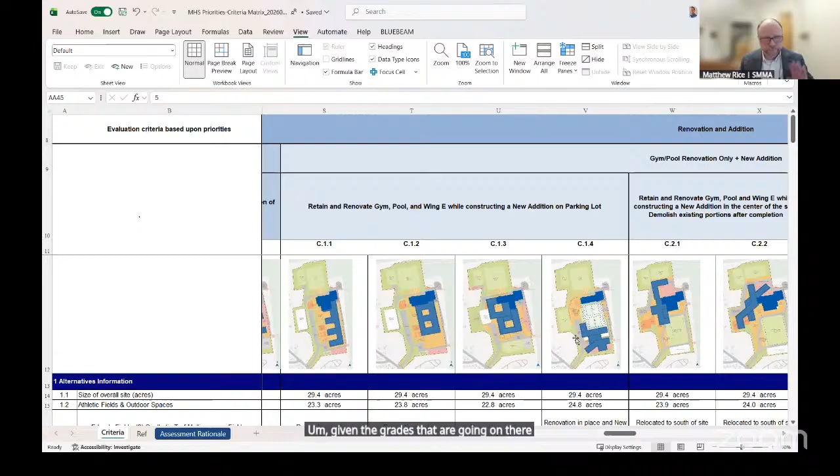So that's why you start to see when you get into the C3 options, for instance, versus if we went all the way back to like a 1.4 here coming in, you're really forced to move all traffic up into the site and do something up here, which is just going to be trickier given the grades going on there. Just again, high-level comparative analysis—that was the rationale.

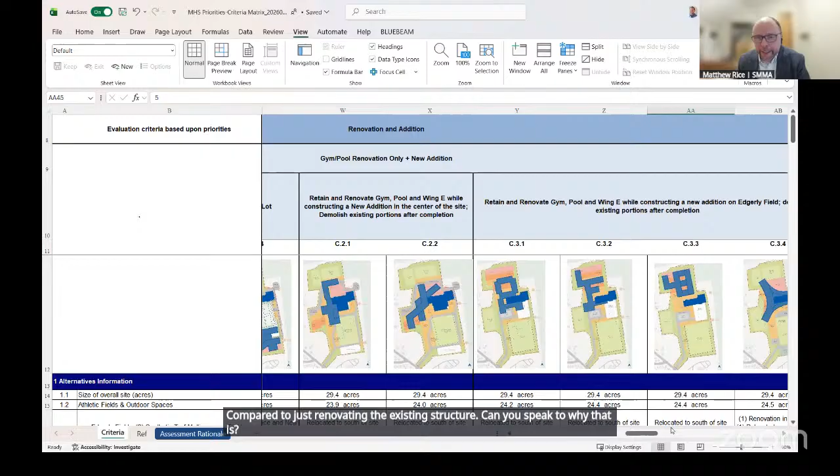Sure. I know I sound like a broken record, but I'm happy to modify things as we go forward. I didn't intend for everything to be right on the first pass. The thought process was that once we get up to those 7 or 8-story buildings, maintenance becomes inherently more challenging because we need more floor scrubbers on every level, or we're moving those things up and down on elevators. That was the guiding factor - once we get to those really tall buildings, maintenance seemed more challenging. We can certainly shift it from a 0 to a 2 potentially as a modification, to reflect that it's not horrible, just less than ideal, as you could potentially achieve that in a 3 or 4 story building for instance.

Did you want to make a motion to adjust those scores, or are you satisfied with that answer? I'm sort of torn too, because I do understand the rationale, but it's hard for me to understand. Basically what you're saying is it correlates almost exactly to the height of the building.

There is that, yes, and there was also the impact of the existing building and the challenges inherent with maintaining it. Even in the code repair upgrade, going back to Luke's point initially, there are challenges in terms of maintaining that existing building, getting out on the roof. There are only 2 access points of stairs that go out to the roof, and you're forced to traverse across the entirety of it, which during winter is challenging in terms of access, and you have to carry filters and things up vertical ladders. So there are inherent challenges from the existing building, and there's probably some blending of existing building percentage to height as we go up, combining to give that overall evaluation on ease of maintenance.

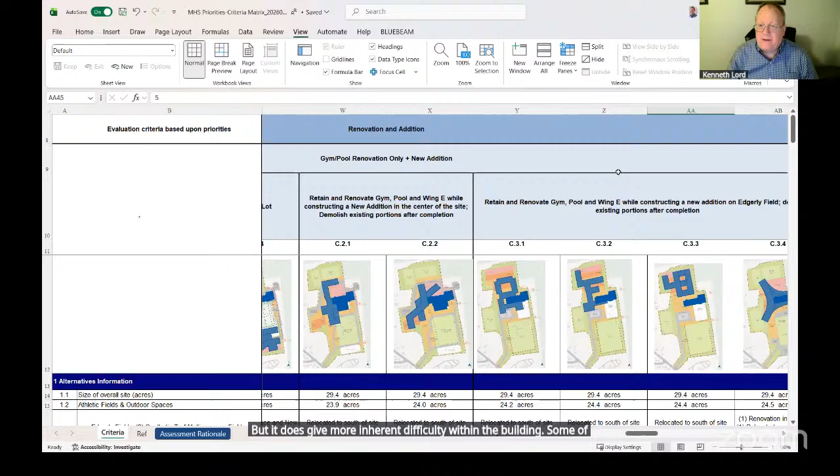I was just going to chime in and support what Matt's saying. A taller building means moving materials throughout the building takes more time. It's not a 0, I don't think, but maybe a 2 or a 3 compared to a 5. It does give more inherent difficulty within the building - some equipment becomes more complex as far as being able to push water throughout the building. So things become more challenging, but not a 0, I think.

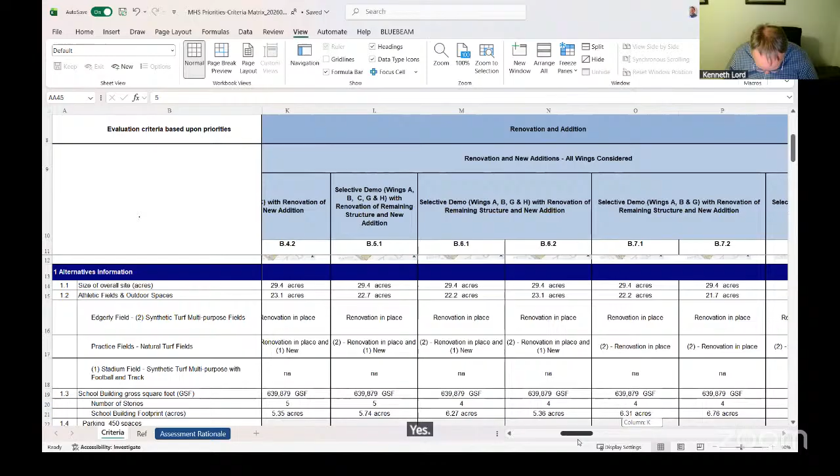Do you want to make a motion around this 5.1? Yeah, I would move that those be made a 3 instead of a 0, because it's still essentially a new building. Paul, could you clarify 5.1 - where am I looking, are we back in the B's? Yes. Okay, got it. I mean there are 2 under now, sustainability, Matt?

Ease of maintenance is a 2, not a 0, for those. But I think the question, if you scroll over on 5.1, is when you get into those C options, which are all newer buildings but tall, they go to 0. Is it really a 0, or is it a 2? Well, those are the C's. I see what you're saying - 5.1 in terms of the actual criteria. I did not realize that contradiction until now. Yeah, I just found it too.

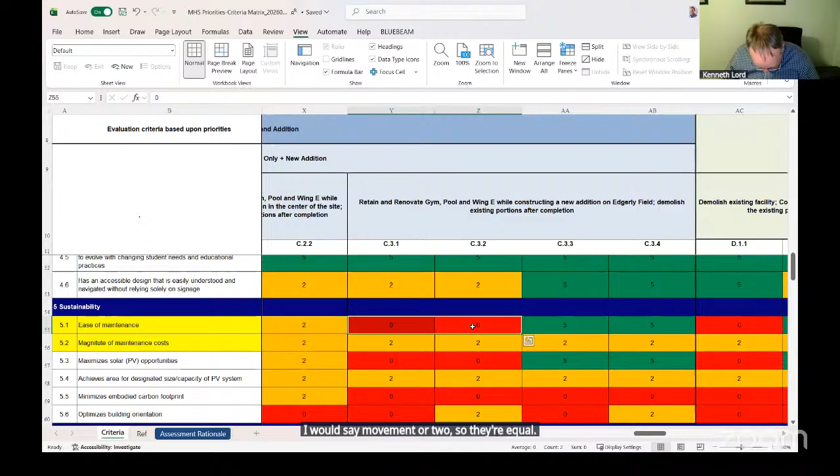I would say those C 3.1, I would move that those be at least a 2, so they're equal. And Ken, are you suggesting the same? Well, we haven't gotten to the D's yet, but since we're talking about ease of maintenance, there are a couple of D's in that category as well. Yes, I would say that D 1.1, as a 6-story building, would be like a 3, as a brand new building at least. So the only challenge is we only have 0, 2, and 5 right now as our 3 different points. Okay, I didn't catch that. Yeah, they'd have to be 2's then.

So the motion is C 3.1, C 3.2, D 1.1, and D 2.1 become 2's, correct, for 5.1 ease of maintenance. Is there a second? Second, by Dr. Galusi. Any questions about that motion before I call the roll?

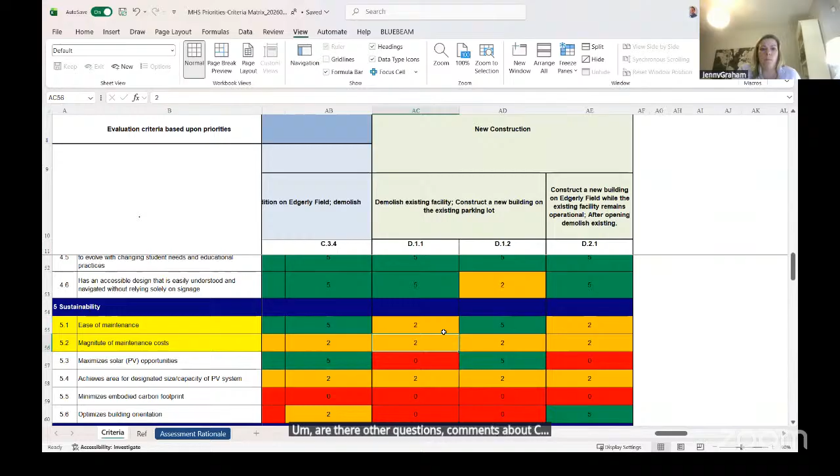Are there other questions, comments about C 3.1 through C 3.4?

Okay, do we want to go to D? Slide over there.

So the D options are the all new construction options. This means removing the existing gym at 30,000 square feet, rebuilding it as an 18,000 square foot gym, which is the smaller gymnasium. It also means building a new standalone pool building versus renovating the existing one. The reason you don't see a separate geometry here is that it would be connected in some way to that existing form.

That's what these volumes shown here represent, that in that square footage there would be a pool building. It can be connected, but still sort of a separate entity in terms of how it operates from a systems standpoint. At the same time, as we move forward, if it made more sense to separate it from that existing volume, that's certainly something we can look at going forward.

The D 1.1 option looks at building the majority of the new building on the parking lot right to the south of the site. As you can picture coming up Steve Miller Drive and having that building right there, it would, in this scenario, extend over both the performing arts wing as well as the southern portion of the vocational wing. So there is still some phasing and disruption to the existing building footprint in this scenario.

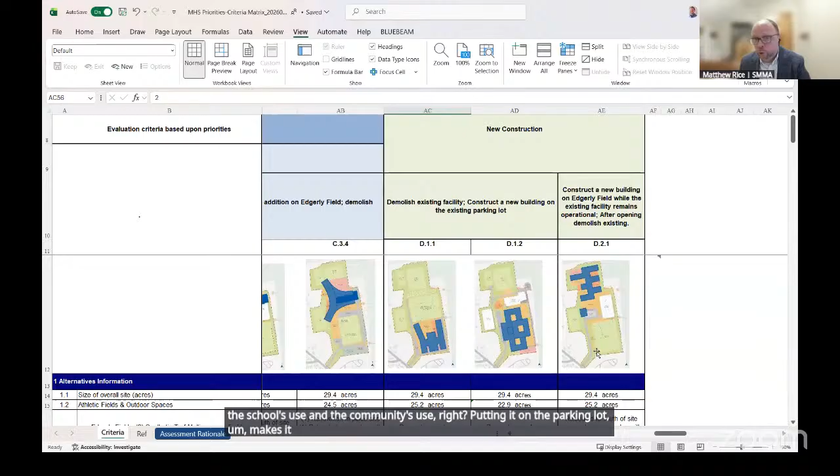Putting it on the parking lot makes it more accessible to people coming in off Winthrop, but it would also make it a bit of a hike from the school down to the pool in this scenario. Maybe that's a good thing. I think those are the types of things we can study moving forward, but there are a limited number of options where you could visualize that happening.

Thank you. I guess what I'm hearing is that the people who have a primary focus around keeping the pool seem to not fully be hearing or understanding that if we keep the pool, it will still be closed for 18 months, 2 years, maybe more. I would say between 12 and 18 months is probably the time for renovating the existing pool, but yes, in a renovation scenario there would be a time without the pool for that duration.

I certainly think that if we end up prioritizing pool access, that's one of the reasons—I know we're not picking an option today—but the new construction on the field allowing us to keep a pool or put a pool somewhere. It just seems that the folks most concerned about the pool are unaware they will have no pool for a year and a half.

We have one option here that would actually allow them to avoid that problem. So I think that's important for people to mention when this committee has that conversation. Keeping the pool, to most people, means they can just keep using the pool through this project, and that's just not true.

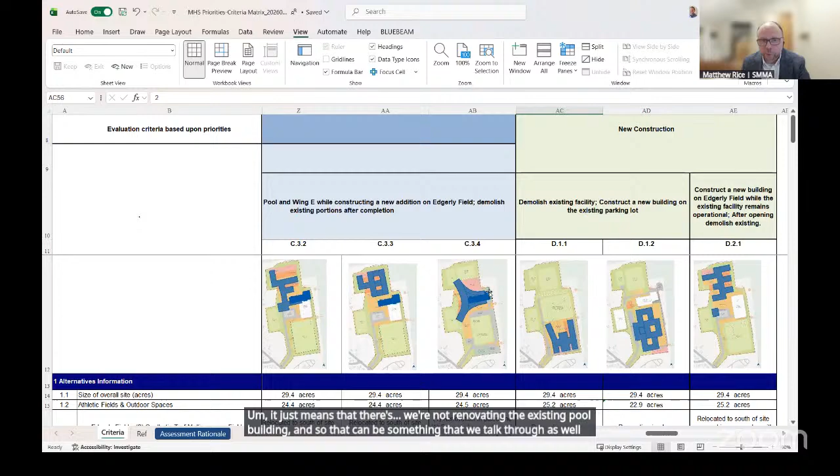Right, and Paul, just to clarify, because it's a good point to make sure we educate everyone about the options—there are other scenarios we could look at, like C3.2, 3.3, or 3.4, where we'd build a new pool towards this corner of the site. It just means we're not renovating the existing pool building, and that can be something we talk through as options move forward, if it's a priority to not lose pool time.

In a related question, D 2.1 shows a pool in the image, and it's a freestanding pool, so we know the MSBA will not share in the cost of erecting the new pool. But is the build of the new pool included in the bottom line number shared with us for D 2.1? Yes—D 1.1, 1.2, and 2.1 all include cost and square footage for a new pool. It's just not shown as a separate standalone volume in 1.1 and 1.2, but the cost and scope are included.

And when I look at the cost table, it says the pool scope for those three options is $12.7 million. So it's $12.7 million, which is less than the pool numbers in basically every, or most, of the other options. So is $12.7 million enough to build a new pool on the site freestanding?

And if it is, it is it the same size as our current pool, or is it something smaller? So, yes, the dollar value is intended to be representative of building a new pool freestanding on the site. To repeat the question: is it the same size as our current pool, or is it a smaller pool? It was not originally estimated to be the same size as the original pool.

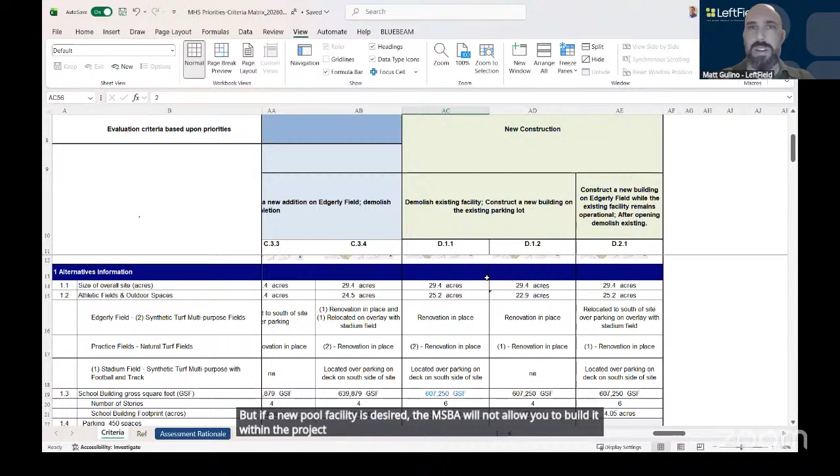So just to add to that, we have incorporated the cost, but if a new pool facility is desired, the MSBA will not allow you to build it within the project—similar to how they'll allow you to go up to a 1,000 seat auditorium, but if you wanted to do 1,100 seats, they wouldn't allow that. So it's just one of those MSBA guidelines and processes we have to continue to study as we go down this road with these options, especially if there is a new pool facility included.

Well, thank you, Matt. Ken?

Does that also mean it could potentially have to be a separate contractor, a separate OPM, a separate architect, the whole nine yards? Yes, it's possible. And potentially it would be incredibly complex to have two sets of contractors on the same site at the same time.

I want to give the example of what is transpiring out at East Longmeadow right now, a project we're working on. The pool building is going essentially in a parallel track in terms of construction, a little behind the main school building, but the same GC, or construction manager, won both of those projects. The same designer is working on both, for all the reasons you just mentioned, Ken, in terms of why it would turn into an incredible challenge to have two different teams. So that part of the process played itself out, and the community wanted to take advantage of those efficiencies, ending up selecting essentially the same teams. But Matt and Helen are absolutely right that it needs to be separated from a process standpoint in terms of procurement, even if it ends up with the same entities being responsible for it.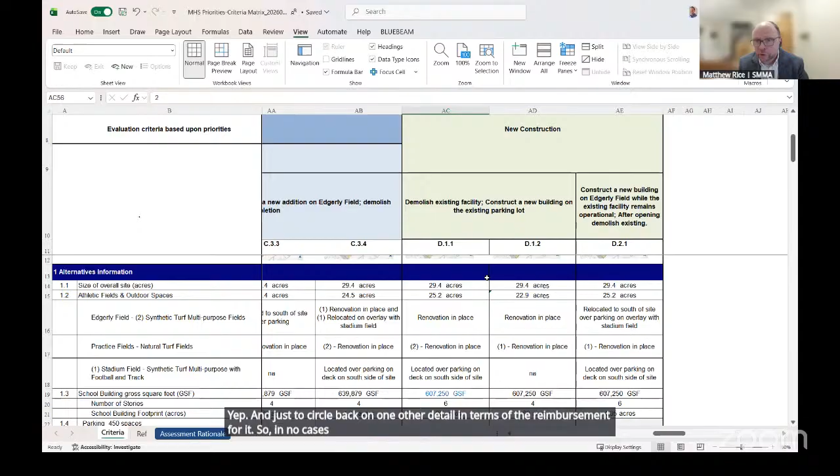Yep, thank you. And just to circle back on one other detail regarding reimbursement: in no case, with any pool scenario, will the MSBA give any reimbursement, whether it's renovation or new construction. The real difference between renovation and new construction, in this parallel track of separate projects, happens when you go to a separate pool building.

Paul? Yes, I think that was a great question about the debt exclusion. I like it also because having it separate lets the voters decide whether they want a pool. Having it part of the high school project means voters don't get to do essentially an a la carte decision-making process. I'd certainly vote for debt exclusion for a new pool, but I think the whole point of debt exclusions and overrides is that the voters decide, not us as a group of elected officials.

This is the ultimate poll. People get to decide at the polls whether or not they want it. By putting the pool in, aside from the fact that in any of the options where it's not a standalone building there will be no pool available for 12 to 18 months, we also take away the very democratic option of letting the voters decide whether there will be a pool. So I really like this.

Having it as a separate item means we can have another group of people, another committee — I don't know if it'd be the school committee or the mayor who creates it — to design and think about a pool, instead of just a thing with a bunch of water. Do we want it to be something more? How big do we want it? Doing it as part of this project means it's just one of 5,000 other things we're thinking about. I hadn't thought about it this way, but I have a strong preference for letting a group of people focused on what the pool would look like really decide that.

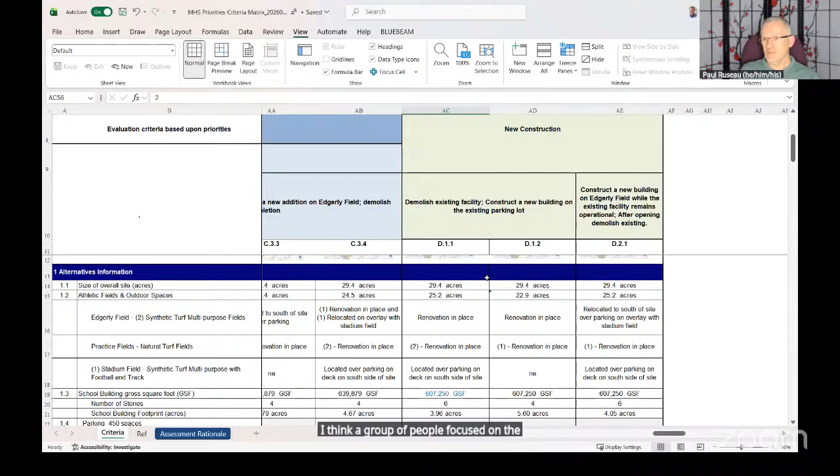I'm not on this school building committee because I care about the pool, frankly. Maybe a couple of people here volunteered because they want to make sure they don't lose the pool, but I'm guessing most of us are not here because the pool was our number one priority. I think a group of people focused on the pool would be the best possible group.

Thank you. Ken? I thought the MSBA would participate in the renovation of the pool. How are they going to separate out things like the fire alarm, the sprinkler system, and the HVAC system? Are you going to have to allocate costs out?

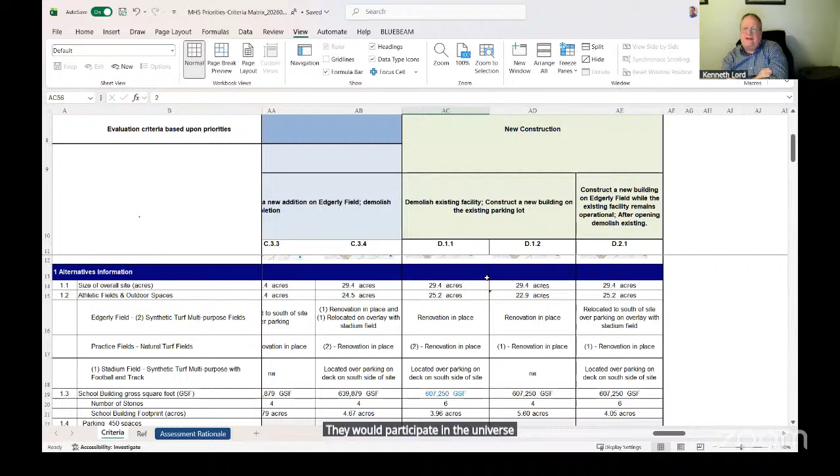It does not need to be separated out from a financial standpoint into a separate project if it's a renovation — it can be connected, they're just not going to reimburse on that square footage. That's what I'm talking about, the reimbursement for it. So they don't reimburse at all? I thought we were told they would participate in the reimbursement of the pool like they would participate in the field house, but not building a new one. No, because there's no baseline pool square footage in an MSBA guideline building. Okay. Yeah.

Questions or proposals about the D options?

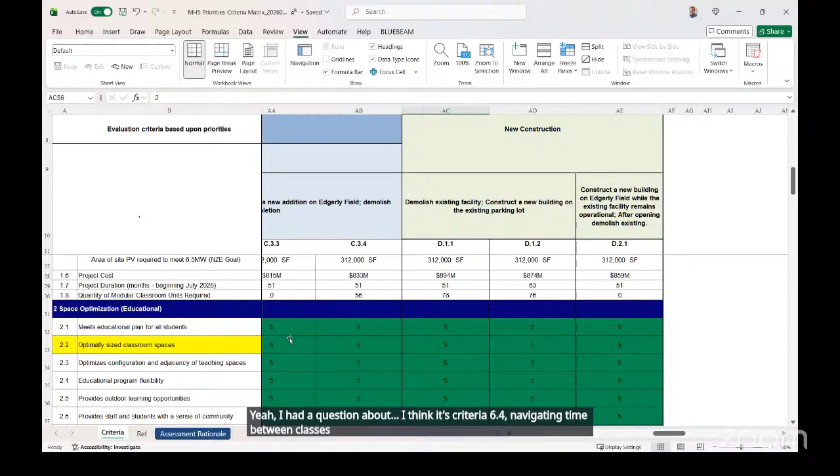Lisa? Yeah, I had a question about criteria 6.4, navigating time between classes. I noticed in the assessment criteria it's based solely on horizontal distance. I'm wondering, if the building is 6 stories high, are students going to be navigating 5 flights of stairs between classes, and how does that get included in the navigating time?

It's a great question, Lisa, and I don't know exactly how we'd analyze it more specifically at this early point. You have a very valid point there — as we go up vertically you may add time in that direction, moving up and down slower than horizontally. In which case you could potentially normalize it in terms of the rating across all of them, so maybe it's just neutral as opposed to 5s.

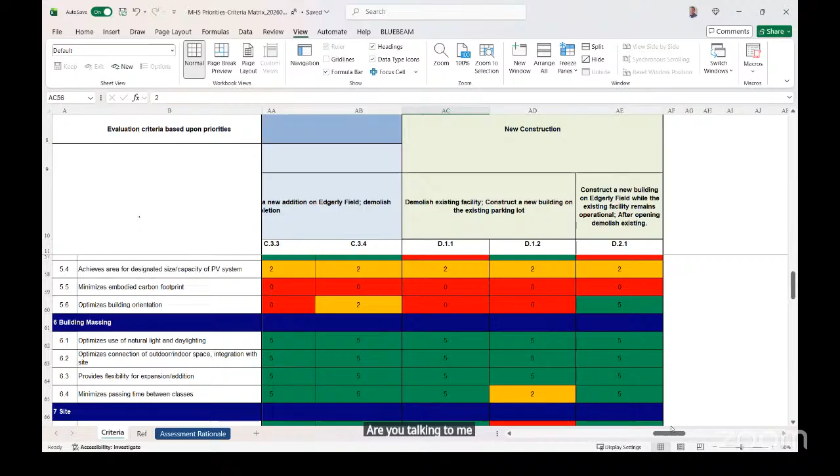But presumably what you're getting at is about compact floor versus a more spread out floor situation, correct, in terms of horizontal versus vertical? Are you talking to me or to Matt? Both of you, in terms of evaluating this as a point situation.

Right, I do think there are issues with having students go up many flights of stairs — say 4 flights of stairs between classes. That will increase the passing time between classes, but it doesn't seem to be accounted for if we're only looking at horizontal navigation.

Paul, is your hand up for this one, or is it still up from previous? Okay, it's up for this one.

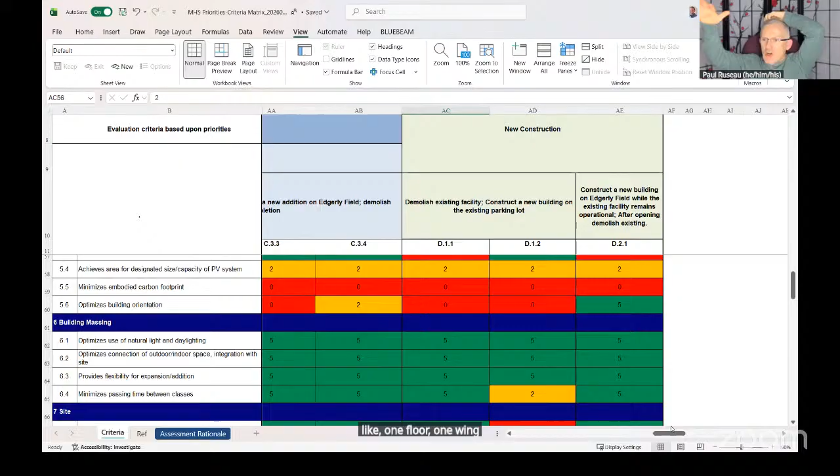Lisa, I see why this one was hard to score, because Arlington High School had one floor or wing for sciences, and another floor or wing for language arts. So in that scenario, nobody goes from science to science, they go from science to English maybe, that's one floor, or English to math, that's down two floors. But whether we take that kind of approach to orienting our academics, I don't think any of us have thought about that.

I don't know if other people have already made that decision. That's such a big decision. I mean,

that's certainly unusual, I've never been in a high school where things are stacked and separated like that. And when we think about where we're going to put different vocational programs, we're very unlikely to have them all lined up in a row like they are now. So figuring out how to calculate the distance from one class to the next is going to be hard until we get past where we are now, I think.

My daughter says she runs between two of her classes every day, has to run, just because of the way the schedule works and what the classes are and the kinds of classes she wants. So I certainly hope we can figure out a design where that's just not a reality, because we also probably don't want to add more time to the school year when we open this, so we can have longer transit times between classes.

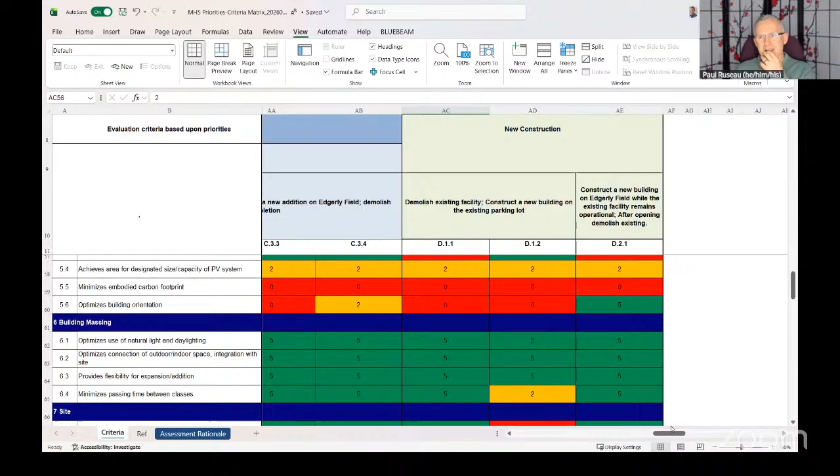I assume elevators will be driven by ADA standards, et cetera. I don't know how many elevators get put in a building, how that gets factored.

A combination of accessibility codes for sure, but also I think it gets to this topic of universal access and sort of horizontal distribution around, right? So we want to make sure there are convenient elevators, acknowledging where different access points into the building are for after-hours community access. And we need to make sure we have a proximate elevator to traverse different floors.

There's probably a formula there combining the horizontal footprint as well as the number of stories. But it would certainly be a subject of conversation as we get further into the design process. Lucy?

I agree with Matt's suggestion about maybe doing twos. I just feel like there's so much still—we're not at the phase to go through how this will be laid out on the inside. We've said numerous times this right now is well beyond just a comprehensive high school, this is a community building.

And so having that conversation about where you're putting the ECC, where you're putting central office space, that also could be on maybe a floor that students don't necessarily have to traverse. The outside schools also have four floors. I know sometimes the passing time is different, absolutely, at a high school.

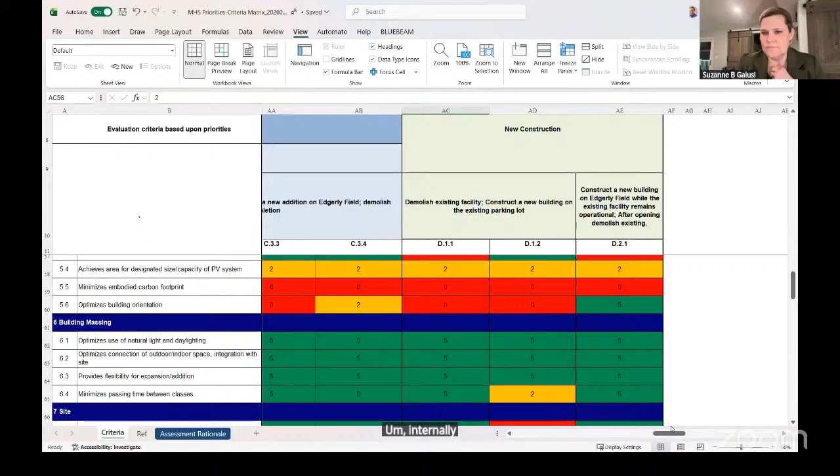Is your motion to do twos across the board just for the D choices? Yeah, that was Matt Rice's suggestion, maybe as a way to move forward, because Lisa made a really good point about the difference between horizontal and vertical. So just the D choices.

Well, there were some C's that had 7 floors. So I think my motion is anything more than 4 floors. So the motion is that anything more than 4 floors becomes a 2. Yeah, it's not a 5.

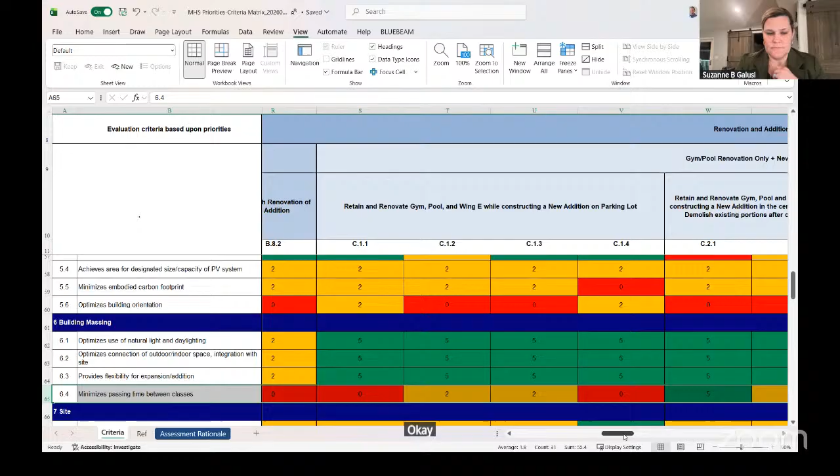There's a motion on the floor. Is there a second? Second, by Ken. I will call the roll.

Jenny Graham, yes. Mayor Longo-Kern, yes. Dr. Galusi, yes. Marta Cabral, yes. Joan Bowen, yes. Ken Lord, yes. Libby Brown, yes. Marissa Desmond, yes. Maria Dorsey is absent, Brian Hilliard, yes. Emily Lazaro absent, Paul Malone, yes. Nicole Morel, yes. Aaron Olapate, yes. Luke Preisner is absent. So 12 in the affirmative, 0 in the negative, 3 absent. The motion is approved.

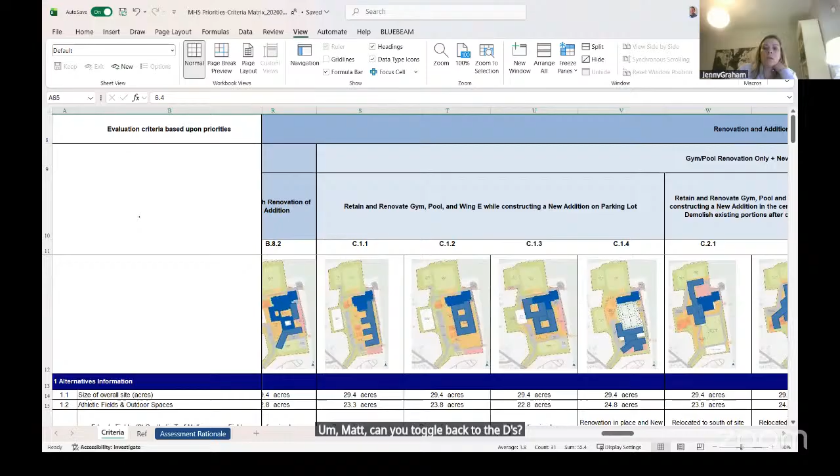Matt, can you toggle back to the Ds? Sure. Are there any other questions, comments, changes to any of the D rankings? Dr. Galusi?

I don't necessarily want to go back regressively about the pool, but I did just have a question. I don't know if this is the right space to ask it, but does the new construction of a Tufts pool factor into this conversation at all? And do we know if that's a community pool or just Tufts use only?

I don't know for sure personally, but my understanding is not necessarily for community use. But we could try to verify that before the next meeting, unless somebody else on the call has an answer. Through the chair, I think that's correct. I don't think it's a community pool, but they are very good to their neighbors and in some cases the communities. But I think it's mainly for university use. Okay, thank you. Other questions about the D options?

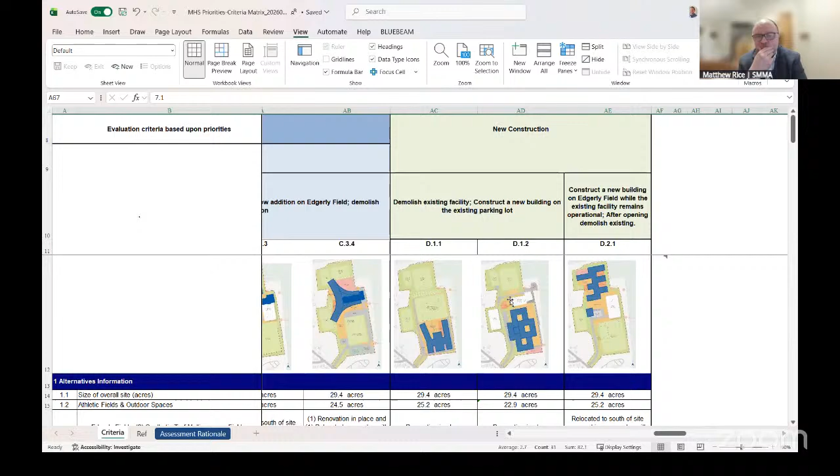Questions about the D options? Is there a motion to approve this document as amended so that it can be posted on our site? So moved, by Nicole. Is there a second? Second, by Ken. I'll call the roll.

Jenny Graham, yes. Mayor Longo-Kern, yes. Dr. Galusi, yes. Marta Cabral, yes. Joan Bowen, yes. Ken Lord, yes. Libby Brown, Marissa Desmond, yes. Maria Dorsey is absent, Brian Hilliard, yes. Emily Lazar is absent, Paul Malone, yes. Nicole Morel, yes. Aaron Alapate, yes. And Luke Preisner is absent. So 11 in the affirmative, 0 in the negative, 4 absent. So this document is approved as amended.

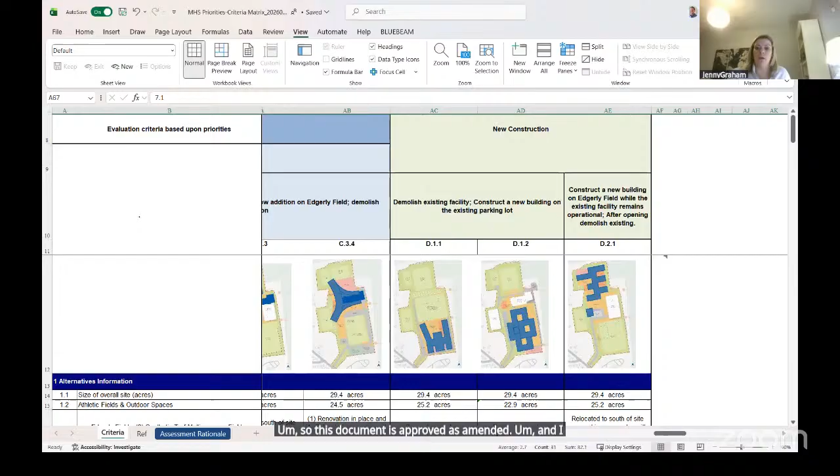And I think we'll make sure it gets posted to the site and promoted in the superintendent's Friday memo, because the thing that is sort of clear to me as I look at the evaluation is that not everything is important to everyone in the same way. I think the pool is a good example of that. Some people are going to vote based on the pool variable. Some people are going to want to know about the cost. Some people are going to want to know about playing fields. Some people are going to want to know about modulars and how long it's going to take. And so this document gives people a point of view to jump off and think about 29 options, right? So I want to make sure we get that out onto the site as quickly as we can.

Paul, did you have a question? Yes, I have a quick question about preparation for the next meeting for the SMMA folks, to get into the narrowing options. I have the presentation from you from January 14th that has the large scale pictures of the plans with aerial massing. Is that still the most up to date? I've been trying to follow along, but the thumbnails on the Excel are so small that it's kind of difficult. I'll show briefly what I'm talking about.